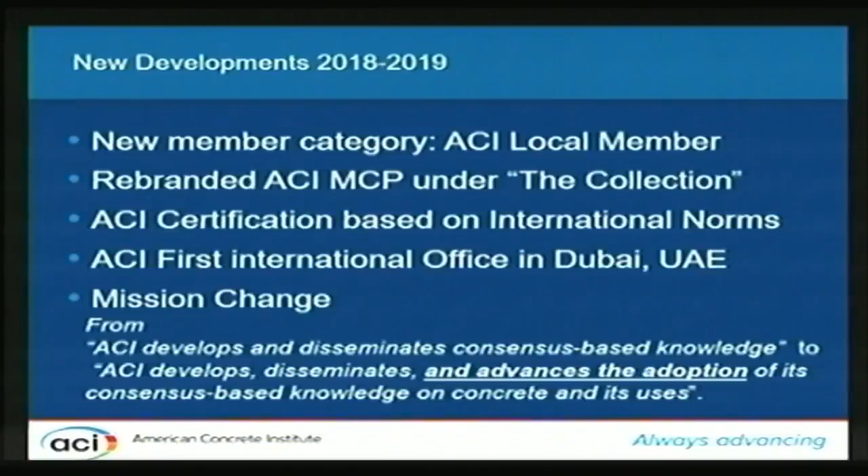And we thought that maybe ACI is very good at doing the library job. We build documents. We can make the best library in the world. But how are we sure that people are using this library? That this knowledge is actually transferred to practice, that this knowledge is actually being used the way it should be, because it is state of the art and really coming from experienced people who spend a lot of time in research and technical and practical experience, and bring this to ACI to develop the code, which is a consensus code.

So if you're in a room, everybody should agree on any statement, on every word. And if you ever went to an ACI committee, you would understand that this is not an easy process. So ACI changed the mission from developing and disseminating consensus-based knowledge to actually developing, disseminating, and advancing the adoption of consensus-based knowledge it's developing. And this is a major thing. So ACI is now having the responsibility to go and make sure that this document or this information is used the right way.

So just to summarize about ACI, I have a small video that tells you how you can be involved in ACI and why you should be part of ACI.

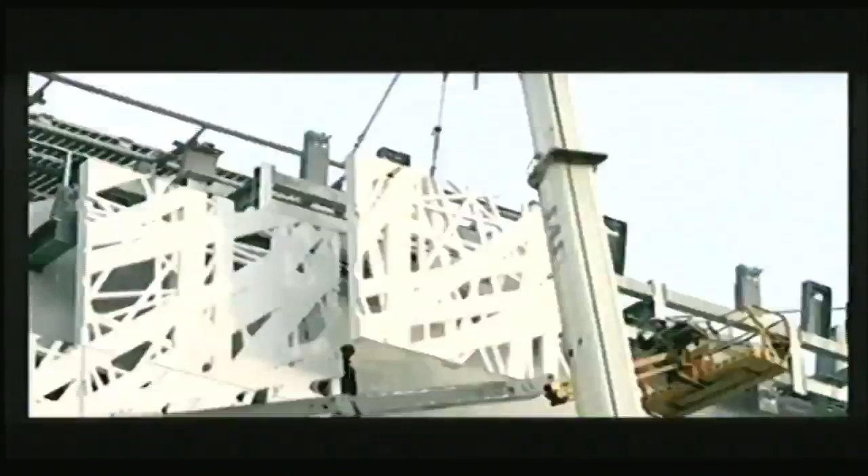Not everyone in our industry is a member of ACI. Just the ones who are pushing the concrete community further, adapting to new technology, investing in their careers, and dedicated to improving their design, materials, and construction. Those who are pursuing an education and teaching the next generation. Those who want to not only find more work, but do it better. Those who want to be part of a worldwide community of professionals, educators, and students in more than 100 countries.

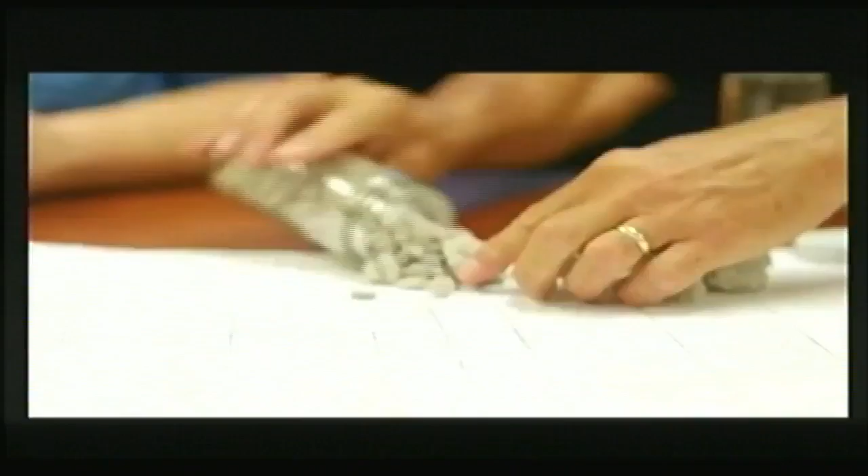Those who want to meet the experts and become the experts. Those who want to stay on top of the latest techniques and create new ones. Those who believe you can never learn enough. Who make sure things are done right the first time. Those who want to be the one others go to for answers on the job site. And those who want to create amazing things. You don't have to be an ACI member to work in the concrete industry, but if you want to exceed expectations in it, there's no better place to be. Whether you're a student just starting out or have years under your belt, ACI membership ensures that no matter what changes the world brings, you will be prepared to thrive, and your life's work will last for generations. Join us today at concrete.org.

So now you know where to go to get your ACI membership. Just go to the ACI India chapter and you can get your ACI international membership there.

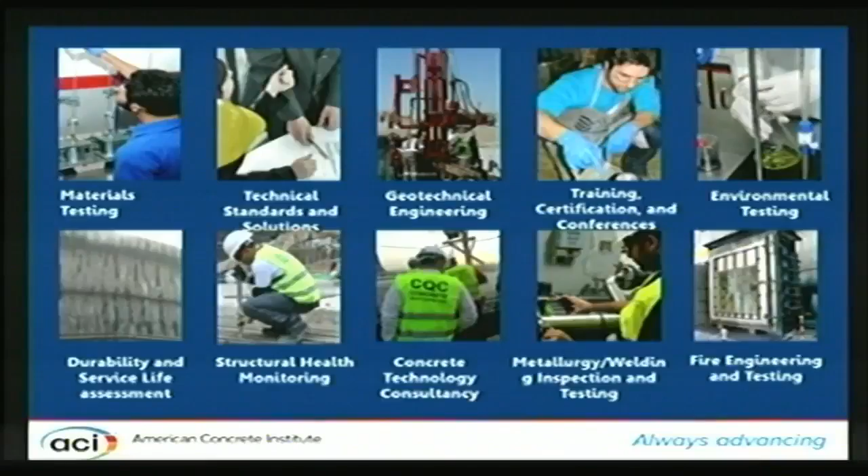And we're involved in some of the world's largest projects, because these projects happen in the Middle East. You all know about Dubai's Burj Khalifa, which is 800 meters. There's another one in Jeddah, which is 1,000 meters. I'll be talking about that. One of the biggest airports is being built in Jeddah. The biggest metro is in Riyadh. There are 7 stadiums that we're involved in in Qatar. So even in Lebanon, which is a very tiny country, we're starting to talk about 200-meter buildings, 70 MPa concrete, 500,000 cubic meters of concrete in a waterfront city.

So from Lebanon to Doha to Saudi Arabia to Kuwait, we have the International Airport of Kuwait, which is a very sophisticated design by Foster that really challenges any concrete expert. And all what you think about concrete, all what you've heard about in the last 2 days, is already in this project. So you have to actually experiment what we've been talking about.

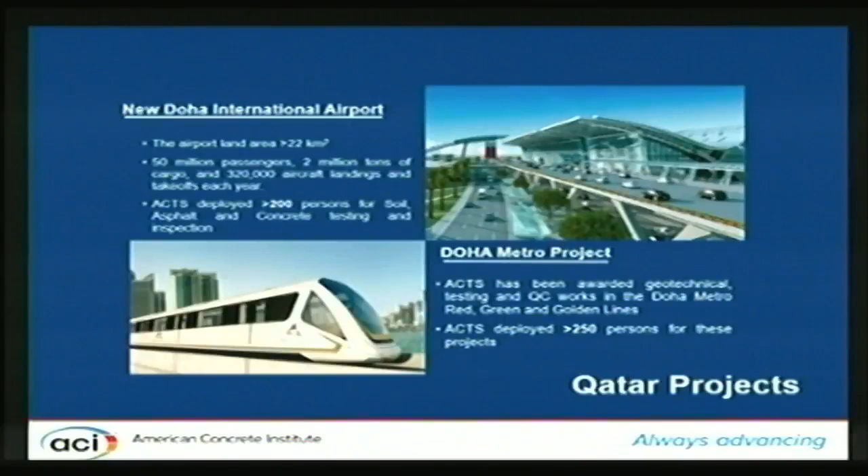And the new Doha Airport, the Doha Metro project, as I said, we have the stadiums currently under construction, 7 stadiums. We are involved in 7 out of 8 stadiums there. The Riyadh Metro project is still under construction. It's a huge project, around $30 billion with 6 lines. We're involved in 2 lines in a full-scale engagement, and in the other lines in different services.

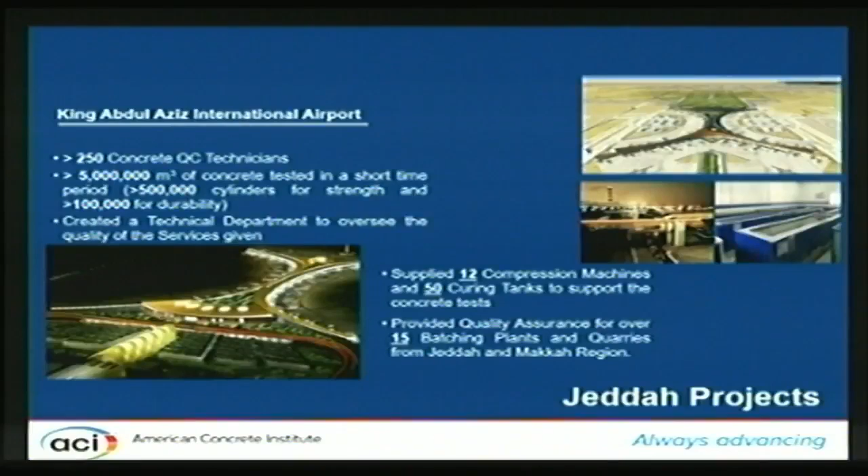The one I want to talk about is the one that really opened our eyes. This started in 2011, I think, into large-scale projects. It's the King Abdulaziz International Airport in Jeddah, where we really learned what scale means. I'll talk about it in a second. So in Jeddah there's also the Kingdom Tower project, I'll be talking about it in detail, and the Haramain high-speed rail, which is connecting different cities and also the new airport. But let me talk about the airport itself.

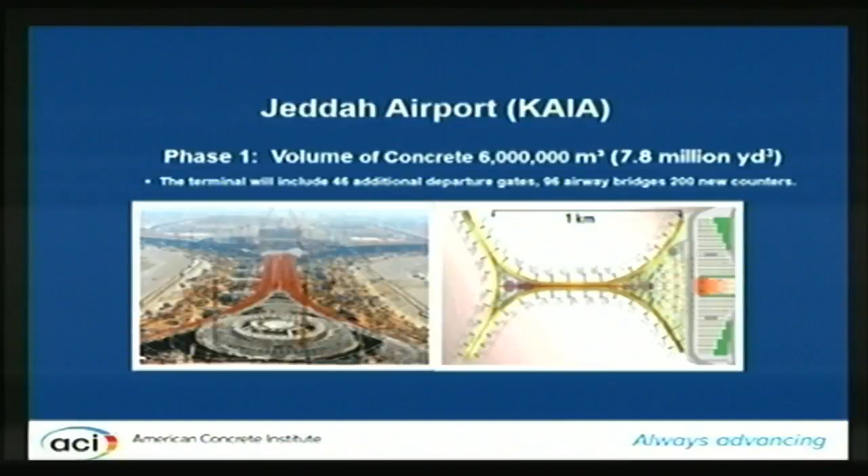So the total volume for this project is 6 million cubic meters. Initially it was designed to be finished in 4 years. We're in the 6th year now, and I think we need another year to complete. This is phase 1, for 30 million passengers, and there is another phase 2 that hasn't started yet. It involves a multi-story car park, railway stations, automatic people mover, and a road network around it, around 20 kilometers with an expressway, and of course the aprons, taxiways, and tunnels.

In the construction stages, we started with piling and footing works, raft foundations with mass concrete. The volumes even for piles were around 500,000 cubic meters. Raft foundations had 1.2 million cubic meters. Self-compacting concrete around 60,000 cubic meters for the arches. Roads and bridges around 1 million cubic meters.

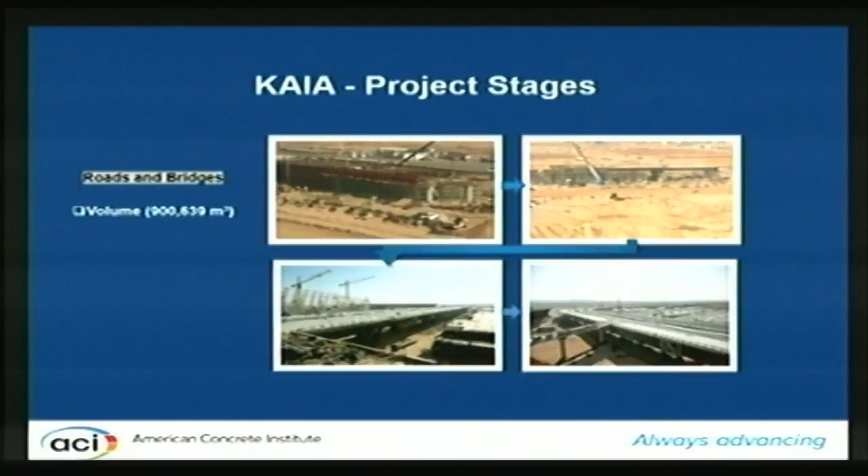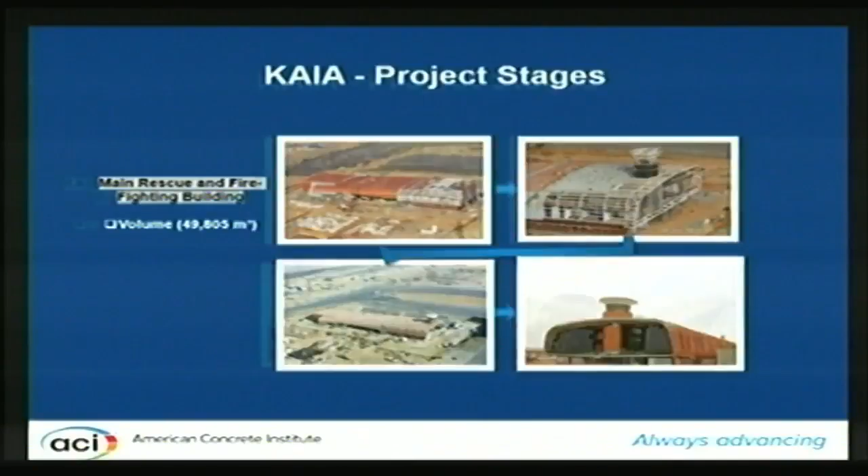And they started, and we're completing them as we speak. Passenger terminal building, 1.5 million cubic meters. Air traffic control tower, small one, but very, very difficult in terms of concrete strength and fairface and all what's needed. The firefighting building and rescue center, around 50,000 cubic meters, and the high-speed railway is another 500,000 cubic meters. There's also the automatic people mover, APM, which is 220,000 cubic meters.

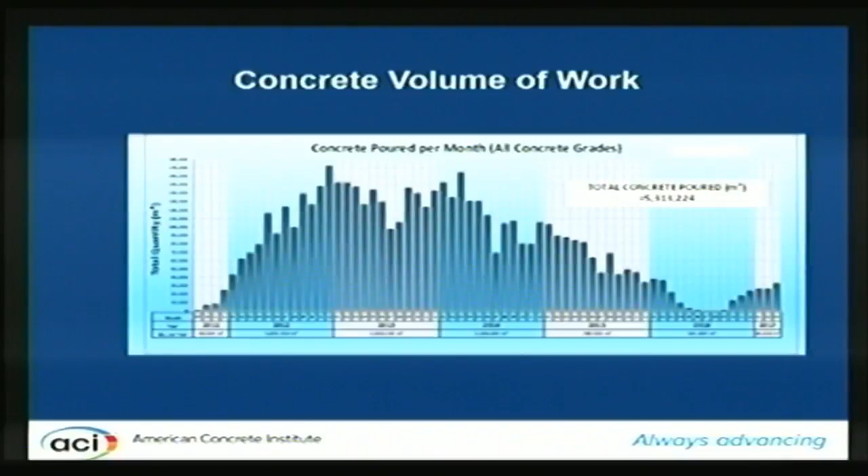Each one has a different requirement in terms of inspection, concrete grade, testing, early age, long-term strength, and long-term durability. The taxiways and aprons also have different requirements. So just to give you an idea of scale, this is 5.3 million cubic meters when I did this presentation, and we reach around 200,000 cubic meters per month, which is quite an intensive scale given the specifications and what's required in terms of testing.

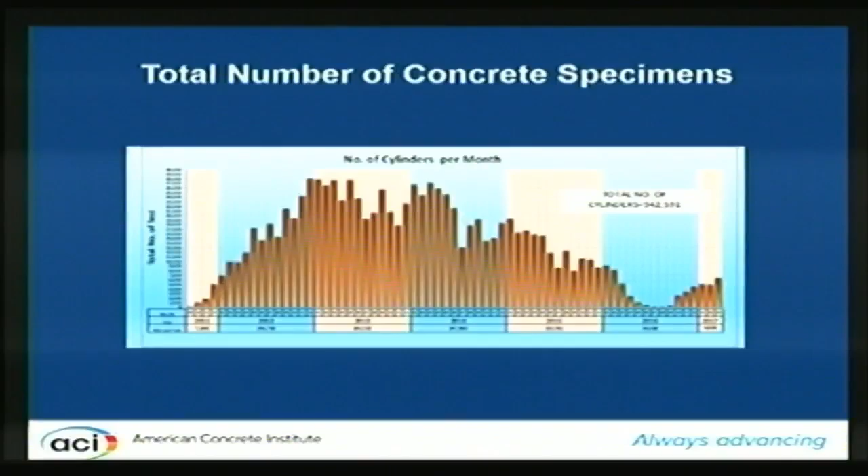And we had 35 mix designs to do there, and it's not just 2 per month at all batching plants. Again, this is the total tests on aggregates, around 200,000 plus tests. The concrete specimens, we reached 1,500 cylinders per day, some taken for compressive strength, some for durability. The chloride permeability, the absorption, all these tests were done also in parallel. So the scale is really staggering.

And when you have something like this, you cannot manage it the way we used to a few years back with papers. You need systems, management systems that take care of that. Otherwise, it's impossible, it's just not possible. It's not a luxury to have a system, it's a need and a requirement.

And once you start implementing the system, you see that you have a better way to manage the project, not just to give the information quickly and have rapid access to it, but in the input you can start having statistical analysis, understand trends in the concrete development program, understand the mix design fluctuations, and how it's coming from the batching plant or from the actual site. So all this information can only be done when you have proper systems implemented.

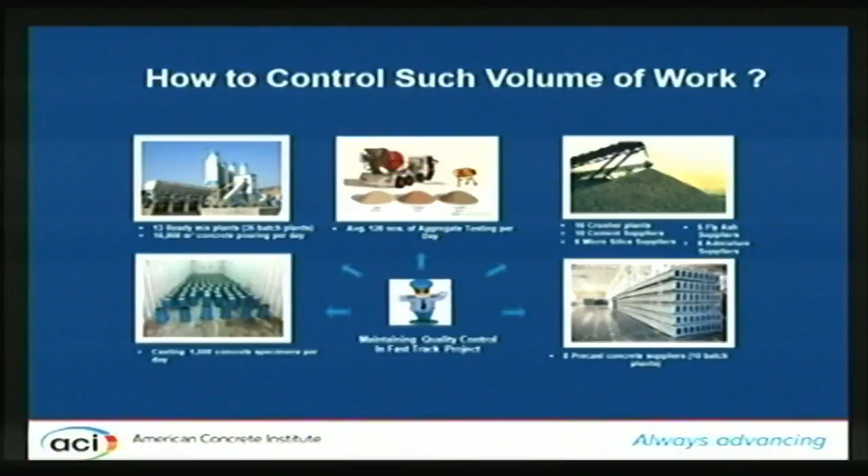So let me focus on the 1 kilometer Kingdom Tower in Jeddah. The project is aiming to become the tallest building in the world, 1,004 meters, around 176 meters higher than Burj Khalifa. The design was made by Chicago-based Adrian Smith and Gordon Gill, and Thornton Tomasetti for the structural engineering, who also did the structural engineering design for the Burj Khalifa project.

Initially what you do when you have a project like this, you grout the ground. You just inject grout to make sure you fill all the cavities even before you start the piling, and you really reinforce your ground before you do anything. Then you had 270 piles between 1.5 to 1.8 meters in diameter, with length varying between 45 and 105 meters. So the biggest piling machine was used on this project to handle this kind of pile size.

Then it was followed by raft foundation, 5 meter thickness. Yesterday we heard about mass concrete - this is typical mass concrete. Remember, Jeddah in summer is at least 45 degrees in the shade and 100% relative humidity, and this is what we had to deal with. The raft foundation happened in August, so that's another challenge we had to work with.

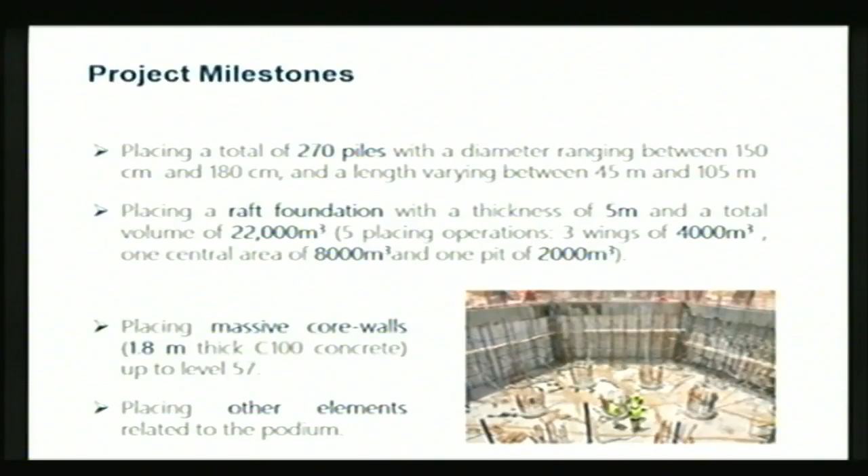Even the core walls were 1.8 meters thick. You think that mass concrete is mostly raft foundations - it is actually, in this case, it was even the core wall of the building. And even other elements in the podium and other columns were challenging.

So we are now at level 64. The project has its own issues because of some internal issues in Saudi, but the ultimate goal is to reach 266 floors, so 202 remaining floors.

As I said, Jeddah is not tolerant weather - it is hot, humid. Even in the winter, we get sandstorms or rain, which is very aggressive for half an hour and just spoils everything around it. So this type of weather brings all the challenges that you would think of.

You have to design and place high-strength concrete and high-performance concrete and mass elements, the raft, the thick core walls. You have to make sure that your finishing is adequate and curing is adequate for the flat work placing operations, and you have to always ensure there is continuous protection of concrete.

Add to this issue the wind. The structural design of this project is based on wind. Not only is wind a critical factor in the structural design, but it's also a critical factor in the construction, because you have to deal with wind when you're building the core wall and slabs at the 60, 70, and 80 floor levels. So you have to have wind breaks, make sure everything is protected, and your own laborers and workers are protected.

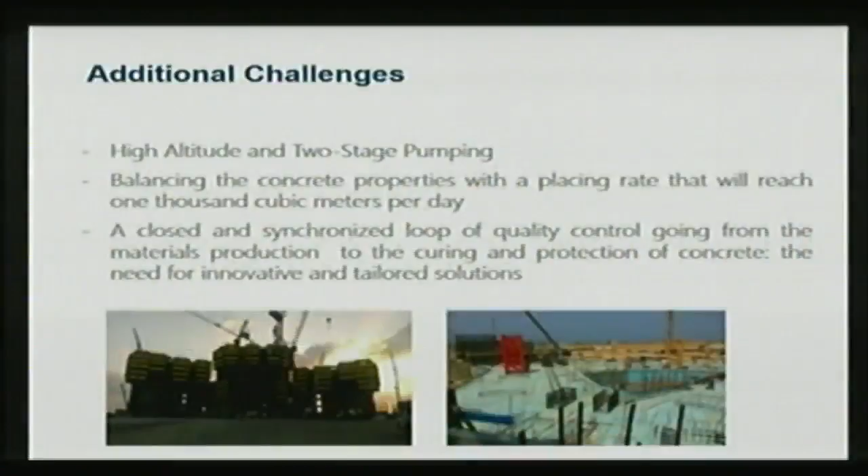We reached, for example, the conclusion that the best solution was to have a 7 centimeter insulation foam on the raft foundation, to make sure that the concrete mass is at a minimum differential temperature, reducing thermal stresses. So let me give you some of the QC highlights.

As I said, you integrate testing, quality control, inspection, and mix design development. These become integrated functions, not separate functions, for projects of that nature. You start from assessment of materials, the aggregates, sand, and cement, then move to mix design development, then back to quality control inspection, making sure the batching plant can deliver what you actually designed. You even check the formwork, because of hydrostatic pressure from the fluidity of the concrete. Then you do field testing, monitor the site pre- and post-placement, do the inspection, and evaluate the hardened concrete testing.

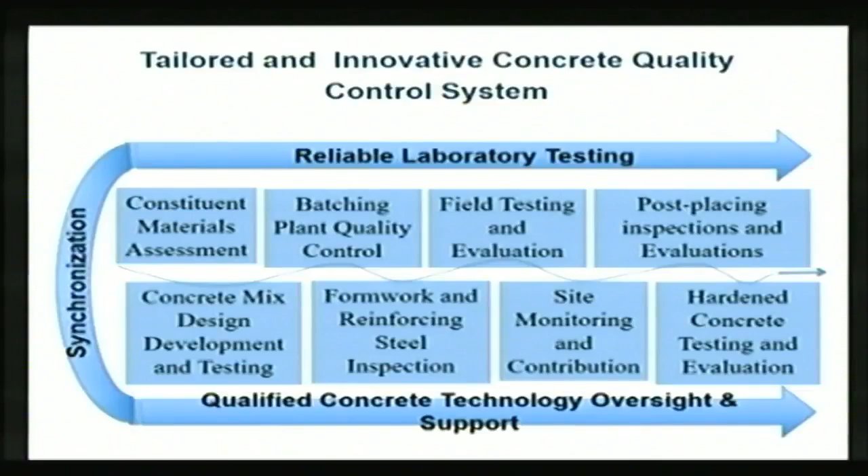The first thing we did was establish a site laboratory. This is something we couldn't manage otherwise, even though our lab was less than 50 kilometers from the project. We had to establish a site lab with a dedicated team. We built 5,000 kilonewton machines, since we were testing concrete of 100 MPa plus. We wanted to make sure the machines could handle that over time, the same for modulus of elasticity testing.

We developed a very tight QC program, and the challenge we took was to minimize repair. So we told the contractor our promise is to make repair costs related to concrete placing and construction zero during construction.

We also established an online system to manage all this information. The challenge was the project manager was in London and wanted real-time access to all information. We had designers in Chicago, people in Saudi Arabia, the client's main office in Riyadh, and the project in Jeddah. So we had multi-stakeholder locations that all needed access to the information. This is an uncharted project, so people are interested to understand what's going on step by step. This is more than a $1.5 billion project.

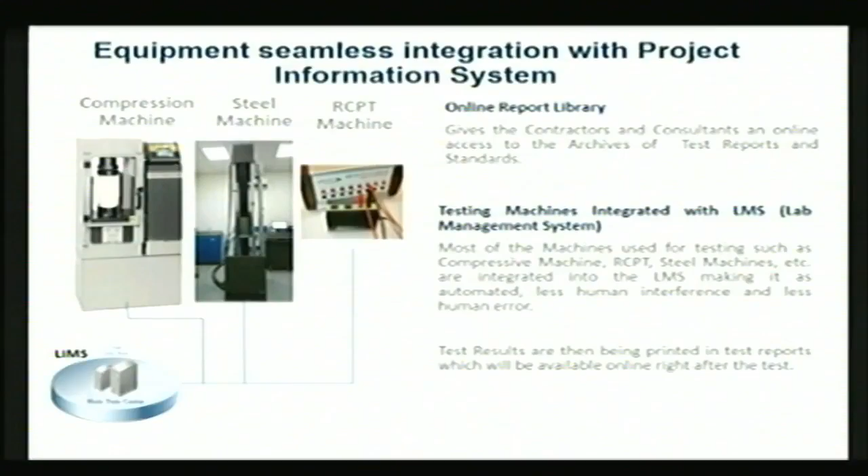This meant minimum worker involvement in writing results—the result comes from the crushing directly to the database, and the database issues the report as soon as it receives the result. Not only that, all this information is stored in the cloud and accessed by the different stakeholders. We had our LIMS installed on the project, ensuring archive access and real-time access to testing information and trends.

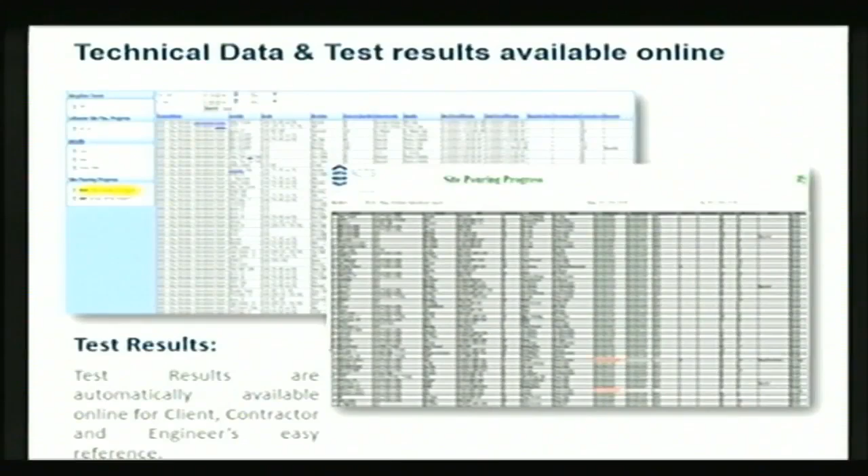So people could access test results online, not just hardened concrete testing but also fresh concrete testing. All our technicians and engineers had iPads and tablets to log information as soon as it came in, so people could have access to it—slump flow, V-funnel, all logged real time through tabs and sent to our LIMS automatically.

We also have online applications developed specially to manage this project's pouring system, so we understand how much concrete is being poured, how much is on each pump, how much is at the batching plant, how many trucks are at the batching plant, how many are on the way, where they go when they arrive, which pump they should go to first, and whether to keep a pump or take it out. All this was managed pre-construction, and we developed a system that ran perfectly for the contractor, especially in August when ambient temperature is above 45, so tolerance for delays is practically zero.

And all the thermocouples, which you heard about yesterday in the presentation, were also linked with our LIMS and information system, so everybody could see the concrete temperature—the fresh concrete temperature—through the tabs, through direct logging of information, and also the thermocouple data backed up to the system.

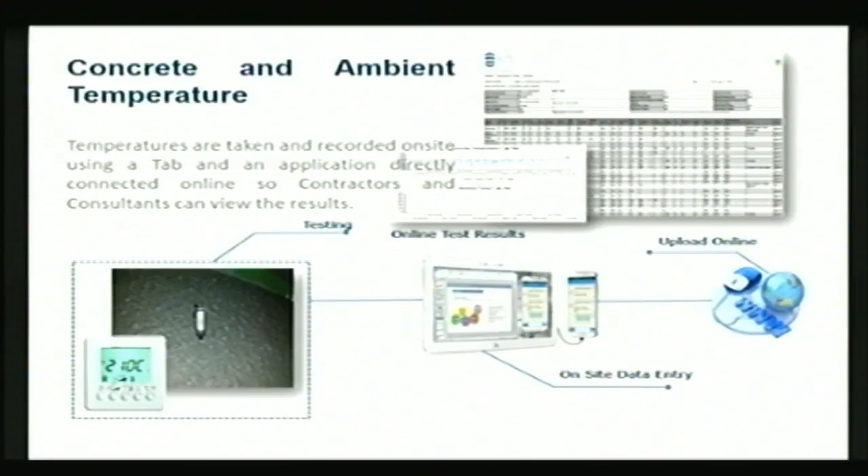So we took slump flow, T50, J-ring, all these SCC tests that you normally do for the self-compacting, self-consolidating concrete. We took these tests and we also logged them live. And visual stability index, all this information was uploaded online as we did the test.

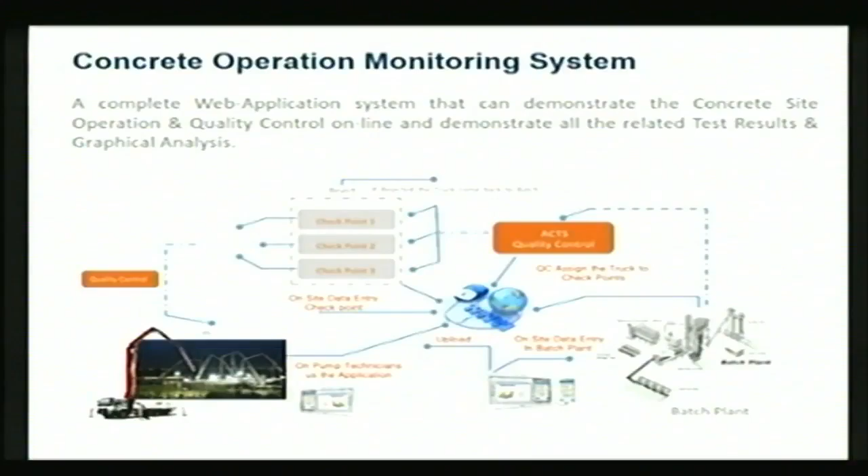And again, the monitoring system was important to check the trucks and the flow of the concrete on the pump to make sure that we maintain a proper flow to avoid cold joints in the raft foundation and even in the core walls. And the truck monitoring system with GPS on the trucks, and also giving the GPS information to the truck monitoring system so we understand which truck is going to come, and if there is a delay, what's the reason of the delay so the driver cannot stop on the way or something. Everything was managed to make sure that the concrete flow is consistently regular.

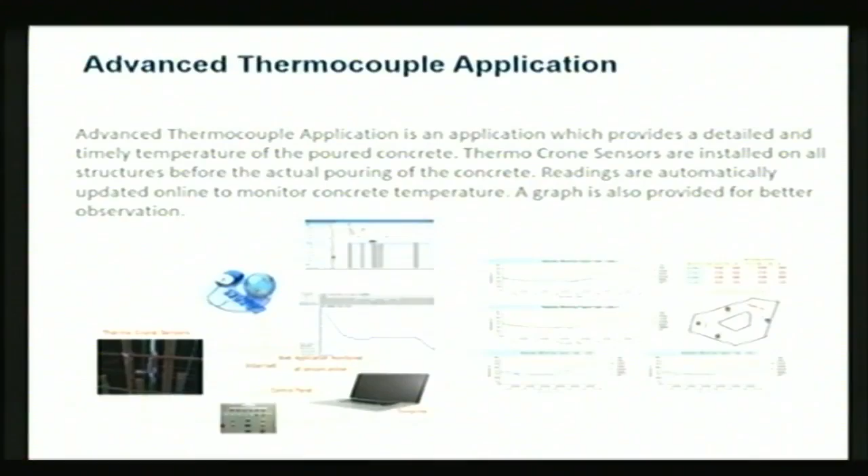So in a project like this, as I said, you have the hardened concrete properties that you know how to deal with. You do the mix design for strength, for slump flow possibly. And you have different grades. We have 30, 40, 50, 60, 65, 75, and 100 MPa grades. It's much better than the airport project where we had more than 30. But even for the blinding, they used 30 MPa concrete. So there was an obsession of making sure everything is safe, everything is structurally right.

But at the same time, it was our responsibility to make it economical for the contractor, because you can throw anything you want on the mix design, but if the contractor doesn't approve the cost, nothing will happen. So we had to really use optimization techniques to get the mix to be economically feasible. The C40 and 50 were used for the slabs and the podium elements. And again, there you had normal concrete, 40, 50 MPa.

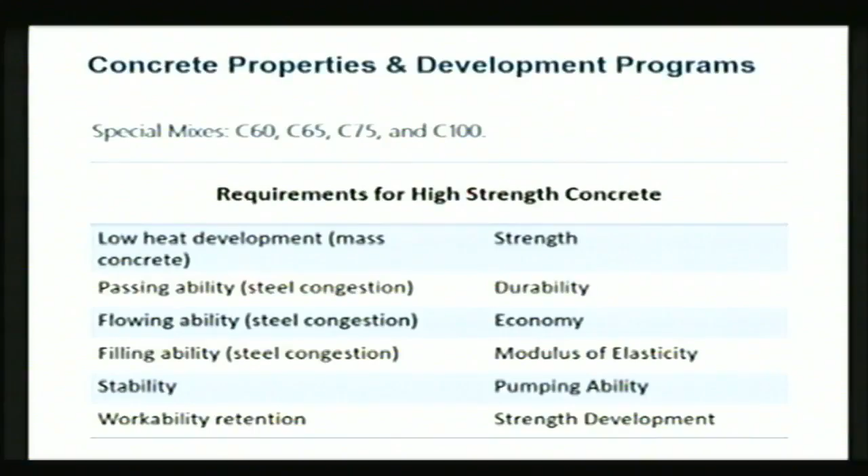Now, all these were not actually specified. So no one told us how do you want the concrete to pass the congested steel, or informed us about what type of flowing ability, the filling ability, the stability of the mix, and what is the pumpability requirements. How do you translate pumpability requirement into numbers, into fresh concrete properties? There is no book that tells that. Even at ACI, you don't find this, because there is no project of 1,000 meter or 800 meter concrete pumping. So we had really to go into a big development program.

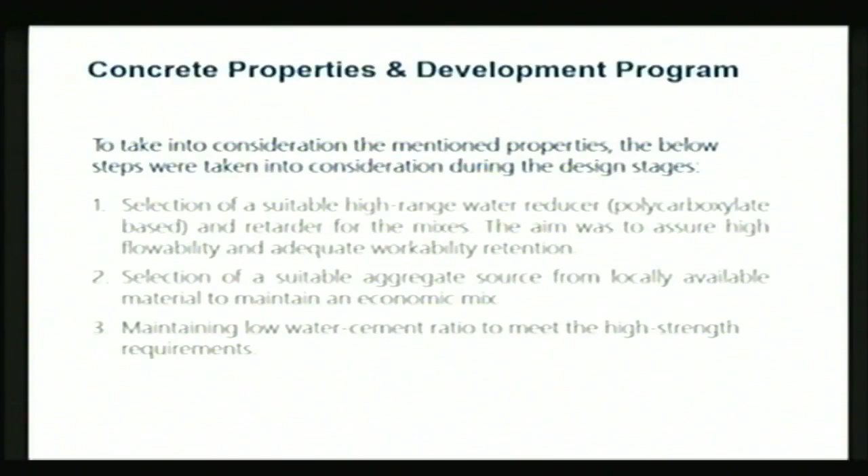First, we had to use the right admixture. So it's a polycarboxylate-based admixture, of course, but we had to add a retarder to make sure we had the retention. This is hot weather concrete, and it's not something you would just play with, especially when you have the core walls, and sometimes they take time. The aggregate was the key for the modulus of elasticity, and I'll talk about it in a while. You want to make sure that you had the water cement ratio low, so to achieve the high strength requirement, but if it was too low, you'd have other problems with the pumpability. So that was another balancing act required.

And the optimization process, as I said, the contractor was looking for cost, and wanted to make sure that we have all the ranges of water cement ratios required to make sure that we address this project properly. We use fly ash as a partial replacement to reduce the heat development, and we use silica fume. We optimized it at 7% to make sure that we get the water cement ratio low enough and we get the durability and the permeability requirement. And we had to really play with the fines and the coarse content and the viscosity modifying agent to maintain the mixture stability.

So what we did, we actually put some limits on ourselves. We said, all right, this is 100 MPa concrete. This is the one that's going into the core walls. And the 100 MPa concrete should have a slump flow of 700 millimeter, which is quite high. J-ring less than 25 millimeter. J-ring is the difference between the slump flows, one which is without the actual cage, and one after the cage, and the difference should be less than 25 millimeter.

The V funnel, less than 13 seconds, 0% column segregation test, strength 100 MPa at 90 days. We agreed with the engineer to be 90 days for the strength. Modulus of elasticity required was 43 gigapascal, and the permeability required on the 1202 was 1,000 coulombs, 20 millimeter penetration on the DIN 1048, and the water absorption, the European test, 2% maximum, and the maximum temperature of concrete was 75 degrees. So these were the actual requirements, and the actual came all right, except for the modulus of elasticity. It was impossible for us to achieve 43 gigapascal.

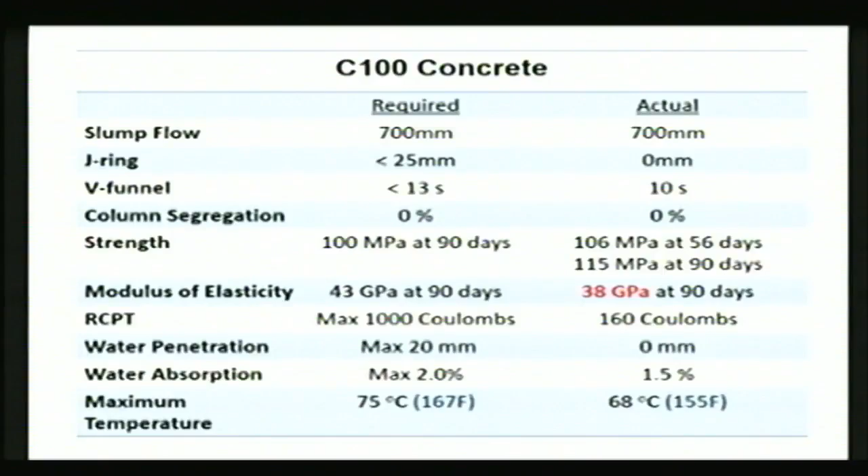And you know, when you have a tall structure, the reason why you specify a modulus of elasticity is because you don't want the people on the top floors to sway with the building. So you want to minimize the sway of the building. You want to keep some sway, but not something that makes it uncomfortable for the people living there. And especially since the owner of the building will actually live in the penthouse on the top floor, you want to minimize the sway. So MOE was a very critical requirement.

So we also had to do high altitude pumping trials. We cannot tell the contractor we'll pump it up 500 meters and then another 400 or 380 without showing him that we can do it. And how can you show it? I mean, you don't have any place where you can prove that this is doable. So we had actually to simulate the vertical height with horizontal length. So we did a 1 kilometer horizontal pumping line, and we had elbows and flanges to increase the pressure. So we simulate the vertical height with the actual pressure on a horizontal level. So each elbow was 1 bar, each flange was half a bar, and we added that. So we designed that system to simulate even more than 500.

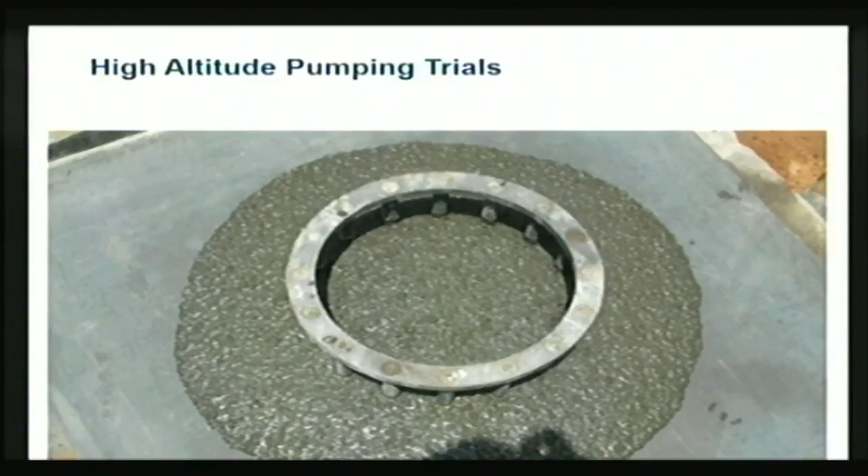We even had to look at the pump pressure. We found out that anything above 200 bar on the pump will not take the concrete up there. So we had to actually reduce the pump pressure below 200 bar, and we had to work that out by first taking the pump away from the first elbow. So you had a horizontal distance, which is 25% of the vertical distance, that you should maintain. And then we also had some slope for the initial horizontal outlet of the pump to make sure the back pressure on the pump is not very high. So when you pump the concrete and the concrete is going back, it doesn't really add to the pump pressure.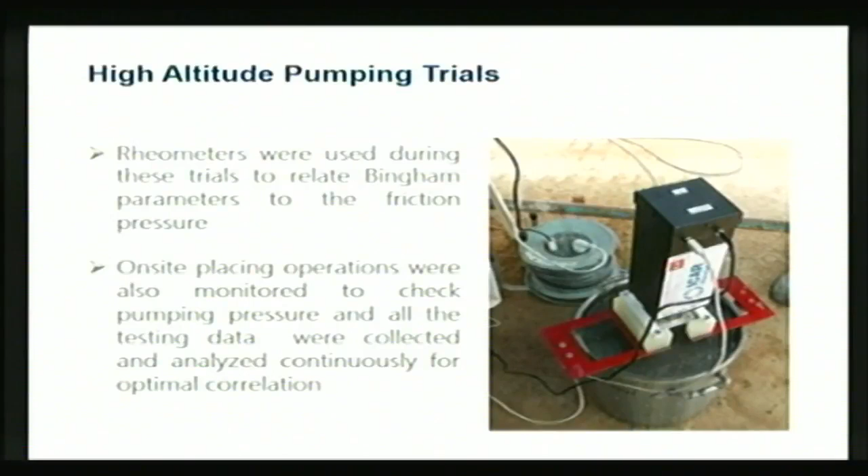So we even used the Bingham model. We actually had to test the yield stress and the shear, as you saw yesterday in one of the presentations. When do you use this? You use it when you want to make sure that with all this pressure, this concrete will not lose its stability. It will not shear up, and it can resist a certain stress. So this is a very necessary testing property that you need to have when you are on site with projects like this.

So we tried to get the flow above 600 all the time, and made the pumpability limit below 200 bars. And as I said, 13 seconds was the limit, but we found out that we actually needed much lower than 10. I mean, we could still pump below the 13-second V funnel. But to really have a proper flow that keeps the concrete going, you needed 8 to 10 seconds. And the viscosity... You have 2 minutes.

Yes, we're finishing. 80 Pascal second, we want to maintain that. So that's why we said we don't need self-compacting concrete, for many reasons. One, it's very difficult to control at the batching plant. Second, we don't want to have a high viscosity. It will be very difficult to pump this concrete.

It will be very difficult to manage it. And the QC measures at the batching plant were already very difficult. So with SCC, it would complicate our task even further. And the main problem was to find the MOE, the 43 GPa, and we couldn't.

And we told the engineer, we changed the aggregates, and we found out that the aggregate shape, the quality of the aggregate, the nature of the aggregate, the geology of the aggregate was so important to get the MOE. And we convinced the engineer that we're not able; the strength kept increasing, the MOE was not increasing. So this relationship between MOE and strength, which was proportional, did not work. So when we changed the aggregate, things became better.

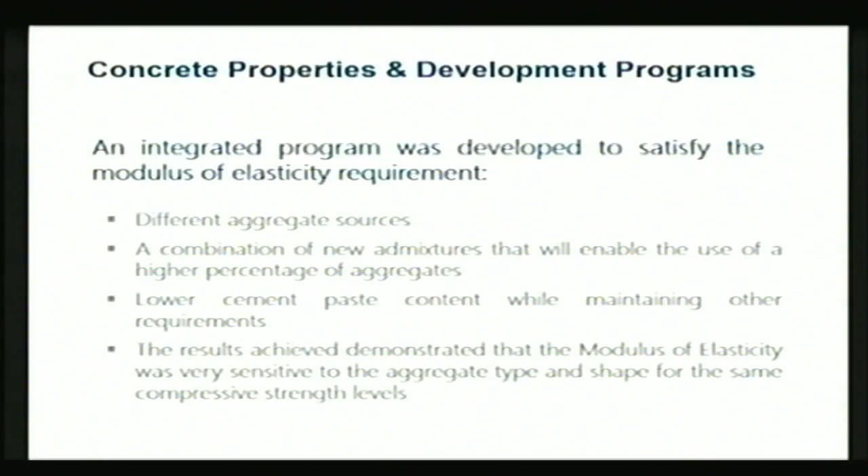So we agreed, because the engineer had a very high stringent requirement of 43. He accepted 38 because this is what we could actually achieve. What I'm trying to say here is that in conventional concrete construction, you normally have pumpability or placing, workability, strength, and durability. But when you come to super tall structures, you have so many other things that you have to balance. And when you balance that, you have to engage the designer with you because they don't know about the fresh concrete properties. How do you achieve this pumpability requirement or the rheology that was demanded? And that's why you need a balanced approach.

And this balanced approach is something that was not codified, so we don't know about it. So I think one of the conclusions is once we have this information out of the Kingdom Tower, we'll be able to codify some of the fresh properties, requirements, and the balancing approach into codes and guides. And I think the other conclusion is that when you have a super tall structure, don't run into the hardened properties before you do the balancing approach properly between durability, pumpability, and MOE.

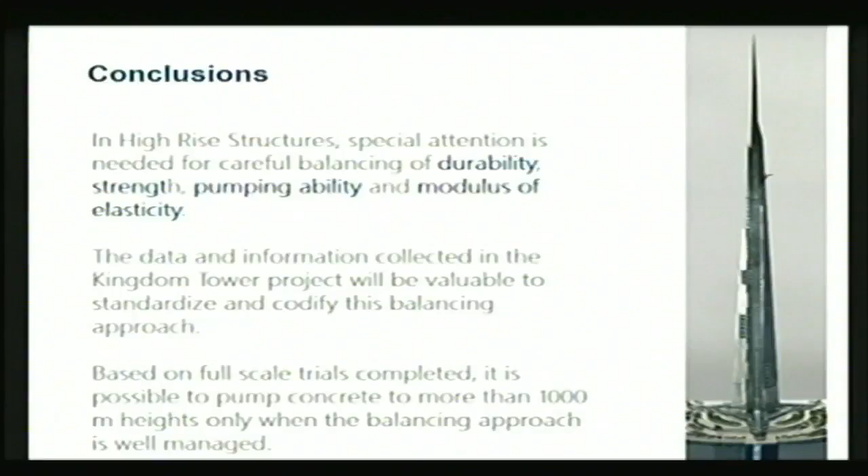And one final conclusion is that based on the information that we have today, we can easily pump concrete above 1,000 meters. The technology is there, admixture technology is there, mix design knowledge is there, and what we have seen is that with the pumps out there, you can actually pump concrete above 1,000 meters.

Thank you very much. Thank you, Mr. Abbott. I think excellent presentation. Please give him a big hand. Thank you. Thank you. Yes, one question. Yes.

This particular concrete mix design, you are telling it's a flowable concrete. Yes. But you are telling it's more than 500 mm, that's all. What was the highest flow you got? Because viscosity is lower than SCC. Yes, that's what you mentioned. Absolutely. This is one question. Second question is modulus of elasticity doesn't match with the established relations. Yes. You told the reason is you wanted to limit the sway. Third question is, were creep tests conducted in this particular study?

Of course. We have a full structural health monitoring system. So there are sensors on every core wall and different sections of the building. I have a different presentation on structural health monitoring, what we're doing there. So we're monitoring there and we're checking the creep and the shrinkage, but we're testing the creep because what we found is that in the first 6 months, the creep is something that you have to test before you can start using the correlation in the formula.

Whatever you do, you have to use the testing results for creep in the first 6 months. After 6 months, you can start using the models that are out there for creep. But yes, we tested creep and shrinkage, and we check them every 30 days based on the structural health sensors that we had in the building. So that's the last question.

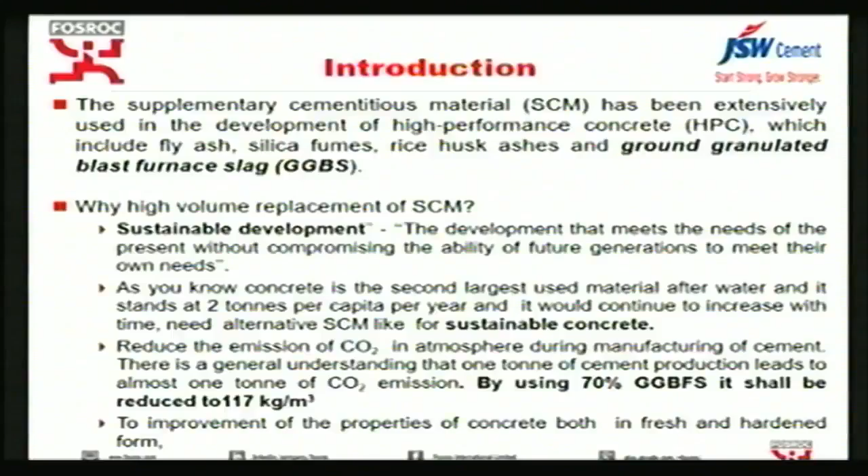Hello, Manjunath. Yes. What we will do is, because there is a mixing process involved, I will explain what this is. We will start loading the drum. You continue with the presentation. By the time you finish your presentation, the concrete will be ready, instead of stretching it long. Okay. Right.

Good morning, ladies and gentlemen. This is the second seminar on ground granulated blast furnace slag. Apart from that, we would like to emphasize the point that if there are some variations at site, with the same mix design and the same kind of chemicals, even with different aggregates the mix will still be the same. That's something we always have problems with at site. The fine aggregates get into the trouble of not getting things right.

Right now you can see here, this is the high volume of GGBS and very little amount of cement. So of the cementitious material, you are going to have only 30% pure cement and the balance is GGBS. And what we have here is typically the zone 2 sand and zone 1 sand. You can see that coarse materials are there.

Now we start loading the drum. We'll start mixing the concrete here, probably without the audio; in one corner of the screen you will be watching what is happening. What type of mixer? Because you are mixing too many powders here. We are using a pan mixer, sir. Okay, okay.

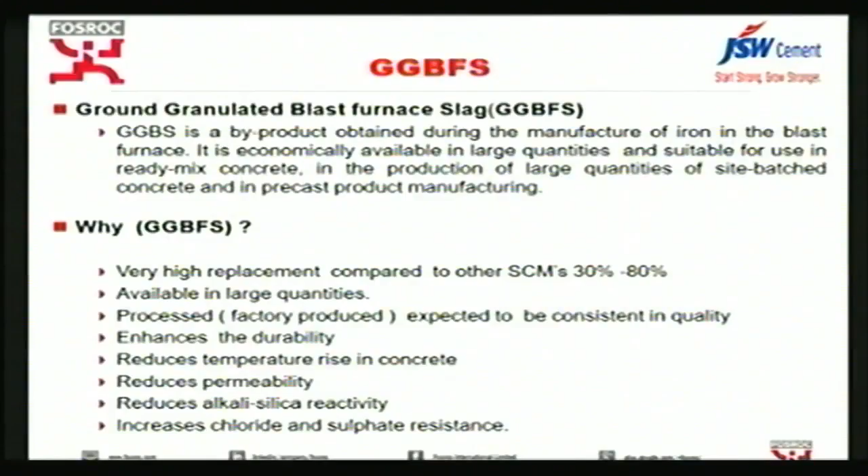So the advantage of using GGBS is not only that it brings down the cost of concrete making substantially, it gives other benefits like enhanced durability and reduced temperature in mass concrete applications. These are the advantages of using GGBS in high volume concrete. I request my partner Vamdev to take over.

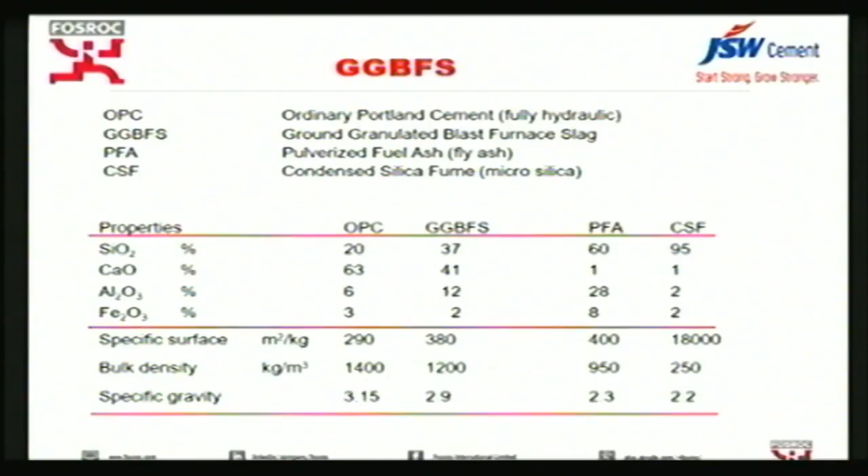See, we have many advantages with the GGBFS. Maybe the limitation, I can say, to overcome these limitations, these are some of the things where we can see how we can overcome this: probably increasing the surface area of the GGBFS so that the hydration reaction will be slightly faster.

What we understood from JSW is that earlier they used to have around 320 surface area. Now they are grinding it to 380 actually. That could be one of the reasons it can help in getting the early strength. The other one is by reducing the water cement ratio, and the point for young engineers who are present here.

See, we know the properties of the concrete: workability, strength and durability. These are the 3 properties. See, workability is the ease with which concrete can be produced, transported and placed at the place where it is required without any segregation. So to produce a good concrete, we require adequate workability.

So just assume that there are no chemical admixtures. How are we going to increase the workability? Either keep the cement constant and increase the water cement ratio, or alternatively, keep the water cement ratio constant and increase the cement content. In either way, if you increase the water content more, it is going to affect the durability and strength.

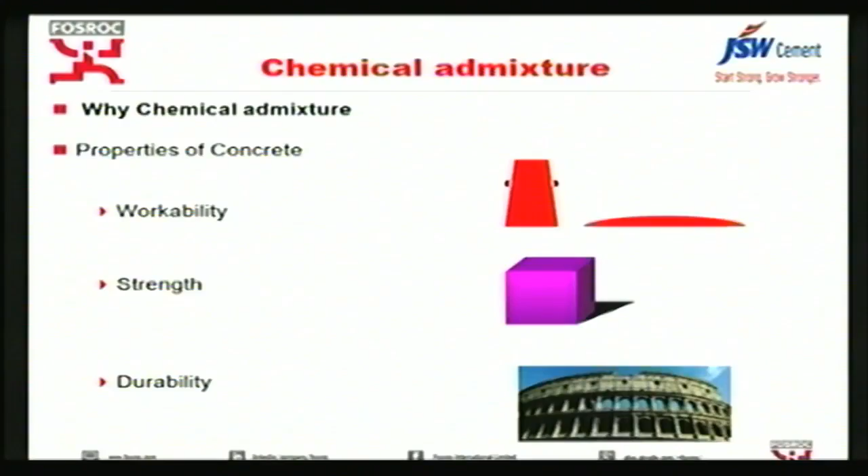And even if you increase the cement unnecessarily, it is also not good for the concrete and also from the point of economy. So this is where we are looking for a chemical admixture which can improve the workability without affecting these 2 properties. So what is this chemical admixture? This is an additive added to the concrete to improve or modify some of the properties of the concrete. As you already know, I will not take much time explaining all these things.

See, chemical admixtures like water reducing admixtures are used to increase the workability. Earlier we were talking about only the slump. Now people are looking for flow concrete of 600 and 700 flow. Chemical admixture is very much necessary. So most of the requirement now is the retention of slump, 3 hours and beyond. People are even talking about 4.

And to achieve the early strength, of late, a lot of precast constructions are coming out. People are looking at 8 hours 10 MPa, 8 hours 15 MPa, especially in the precast industry, to make the formwork turnaround. For early strength, earlier we used steam curing. With the invention of this PC-based admixture, without any steam curing, we are able to successfully achieve 10 to 12 MPa at 8 to 10 hours, so that it will be enough to handle the concrete. Secondly, the stickiness has to be reduced actually.

Nowadays the PC admixtures which are available will help in reducing the stickiness, and reduce the bleeding and the permeability. See, what exactly the market looks for, especially in this part of the world where slag is easily available: now they want to go slightly higher, probably 60 or 70%, from the point of durability and economy. And when they are using such high replacement, the strength development should be very similar to the current one, like 40 to 50% replacement.

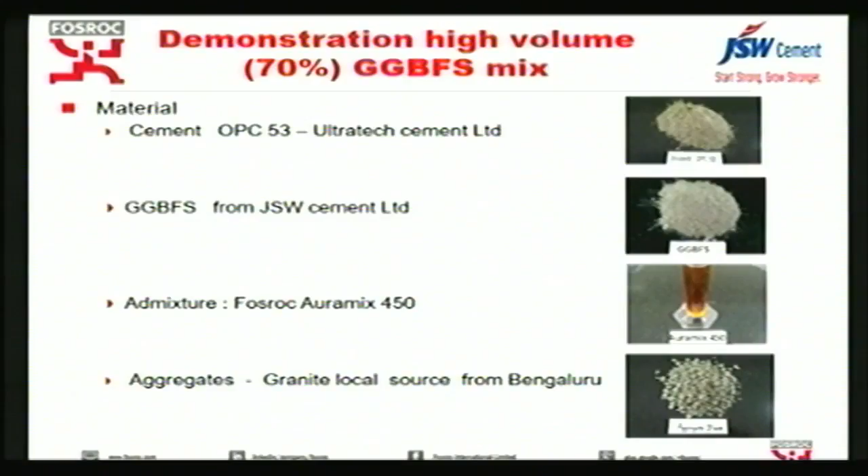So these are the materials we are currently using there. We are using cement, OPC, UltraTech cement, slag from JSW, and chemical admixture, that is a PC based admixture from Fosroc, brand name Auramix 450, and we are using local aggregates.

That is the advantage, so higher replacement can be done.

Just to brief about our admixture, what we are using - it is a PC based admixture, new generation admixture. It gives very low viscosity and very low stickiness. This kind of admixture is ideal for supplementary cementitious replacement like high volume slag, especially from the point of pumping, and very long workability. We can easily get beyond 4 hours workability retention without any slump loss.

To interrupt you, the first mix is ready and the second one is on. In order to release the drum and save on time, I'll be interrupting you.

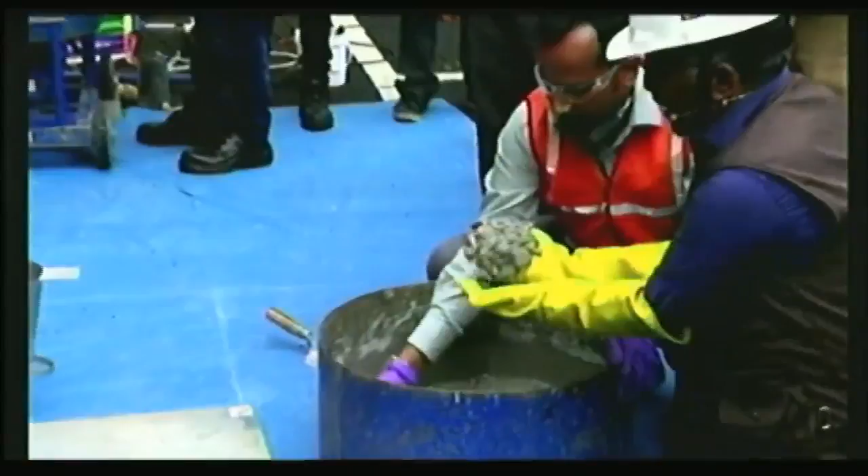The concrete mix with zone 2 sand is ready. You can see here - I'll take the flow and check the cohesion.

What you see on the rear side.

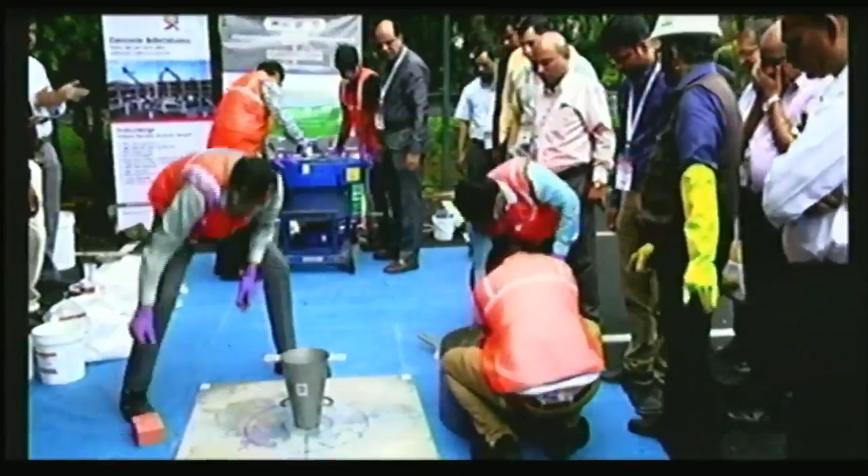The mix is going on with one sand. Quickly I will show you what is the flow. Okay, 1, 2, 3.

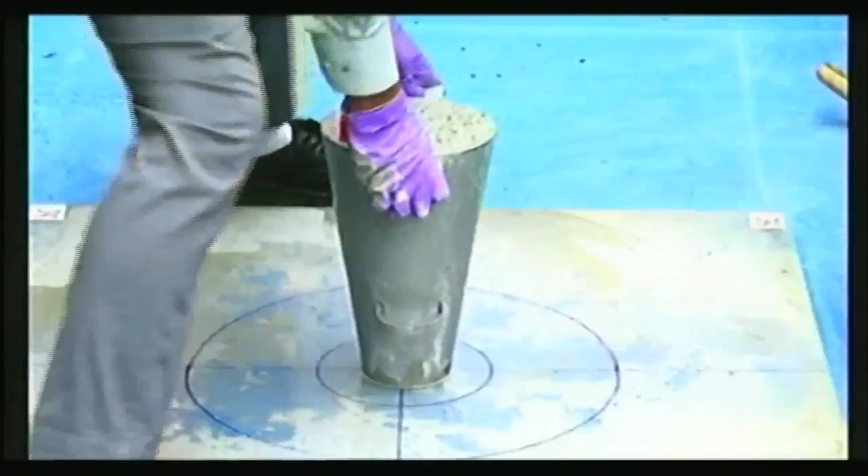Very good, very important thing to notice - the concrete is flowing, no bleed water observed.

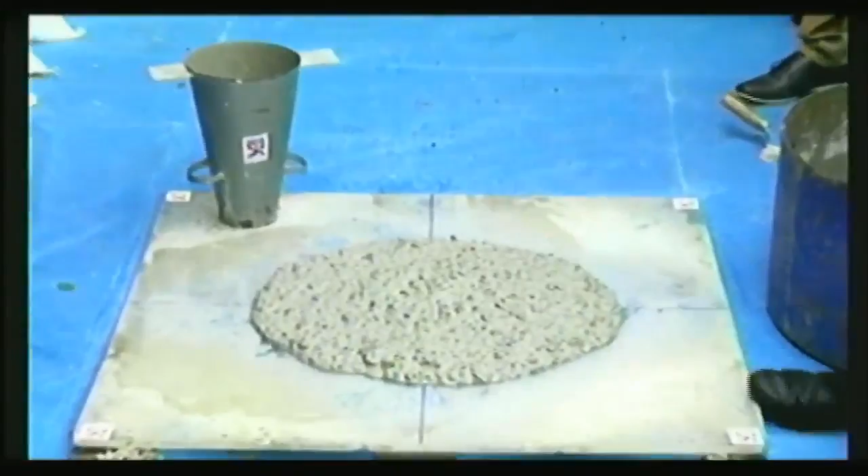This is zone 2, sir. We have Dr. Nagendra with us verifying which is the zone of the sand. Flow is 620 mm.

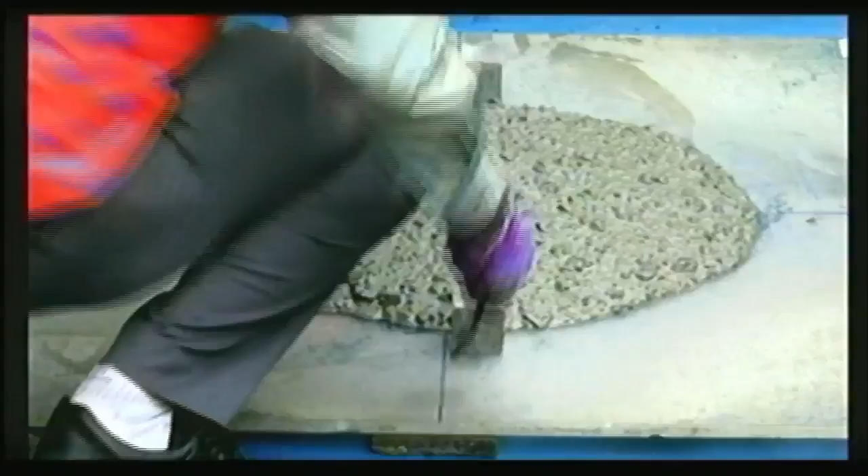Just to brief on this PC-based admixture, as I mentioned earlier, because of these functional blocks, now we can blend all the retarders and the VMA in a single admixture, and if anyone wants a separate retarder from the point of quality control, or a separate VMA, that is also available. But one point I stress here is, nowadays the PC-based admixtures available in the market have retarder and VMA built in. That was not the case earlier when PC admixture was first introduced into the market.

The cement content is 114 kg per meter cube, and GGBFS is 266, that is 70% GGBS and 30% OPC replacement. For 20mm aggregate, sand is around 53%, and water cement ratio is 0.4. Admixture dosage varies from 0.6 to 0.75. Anyway, we'll just confirm with Nagesh what dosage was added there.

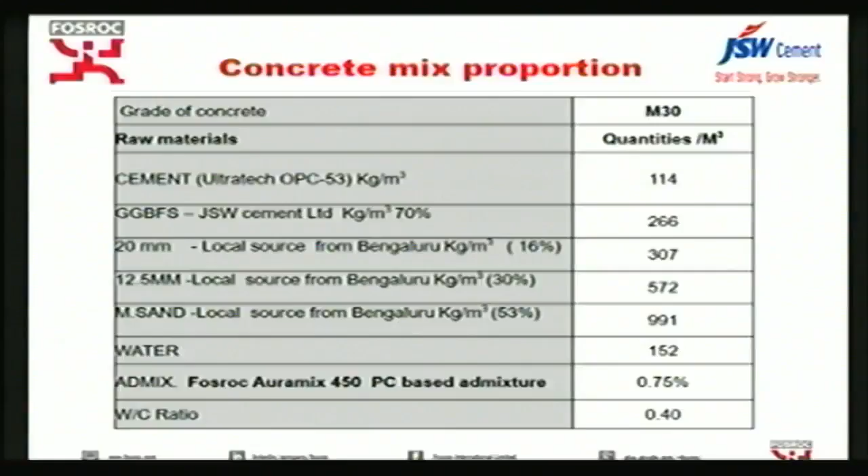Vamdev? Yeah, we are ready with this - this is zone 3 sand.

Hello, hello, check - am I audible there? Yeah, okay.

Nagesh, please confirm what dosage was used there. 0.8 dosage. Mr. Vamdev, I have a question - in both cases? 0.6 and 0.8, whereas all other ingredients are same. Vamdev and Vijay Saab, I'm getting a clarification here - for the 0.6 case, ingredients including water have been kept constant.

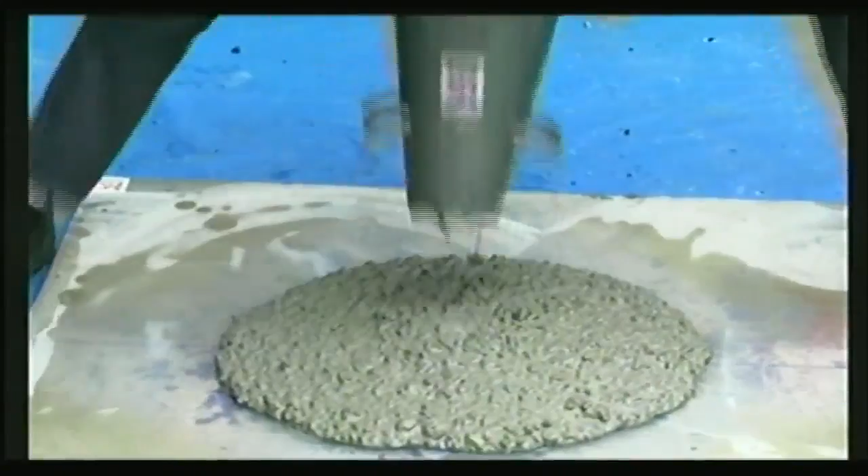They have tuned up the admixture dosage, and looking at it physically, it's still moving, but we have got the same flow as we got last time. I think the shape is a little different. Yeah, 640. Can you go on the other side also?

590 on the other direction.

Vijay Saab, okay, what we have to look at here is the smoothness that we are going to get. I'm just bringing things nearer to the camera. Yeah, it is visible. Probably when we are looking at what is called form finish concrete these days, these kinds of robustness in the mix would definitely help.

Okay, thank you. The third mix will be ready by the time Vamdev completes his presentation. Thank you, Nagesh. Meanwhile, one minute, Dr. Nagendra is here, he has a question for Vamdev. Okay, welcome, Mr. Vamdev, please, sir.

Irrespective of the zones, that is zone 2, zone 3, and zone 1, have you kept the fine aggregate or total aggregate proportion the same? I think they are the same.

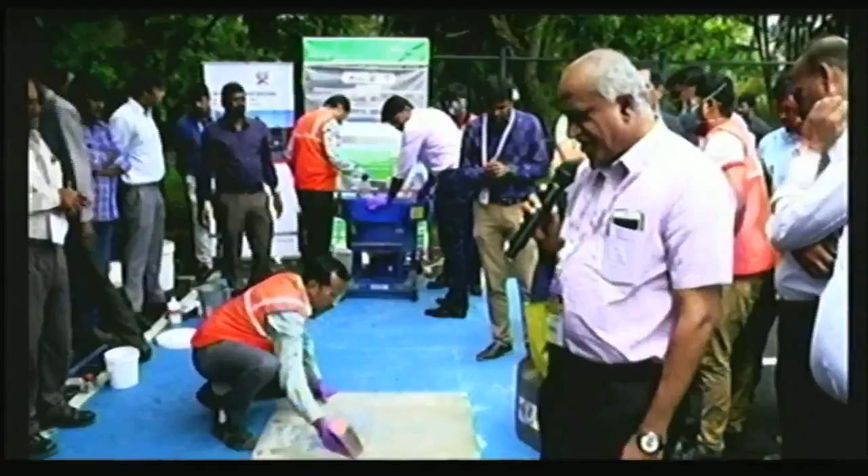Can you hear me? Yeah, I'm hearing you, just looking at the mix. See, what we did in the laboratory, 991 we used for zone 1, and 928 for this weight, same thing. So as the zone increased from 1 to 2 to 3, we reduce the sand content. Zone 3 we have reduced, we are at 879 against the 991.

I just want to make some correction. It's not the same mix, the mixes are different as per the zone. When the zone changes, definitely the mix has to change, so those corrections have been taken. Only the cement and GGBS contents are the same. Total water content has remained the same. So it is the fine powder GGBS and the admixture making the concrete flow.

Now my next question is, which one is most predominant here? Is it because of GGBS or because of the admixture that we are getting the flow? This question goes to both Manjunath and Vamdev.

Come back, come back, this is called trapping and falling into your own trap. So let me... yeah, these are, as I mentioned, some of the properties in these slides. Otherwise, I am through with the presentation. The live demo is going on.

Any questions, you can take them from Vamdev, because I need another 3 minutes to complete this job. Here the mixing is on, so by the time the drum is taken out, you can take questions. And the tricky question that Dr. Nagendra has pitched in, we have Shiv Prakash here who says he would chip in with the answer. Okay, go ahead, Shiv Prakash.

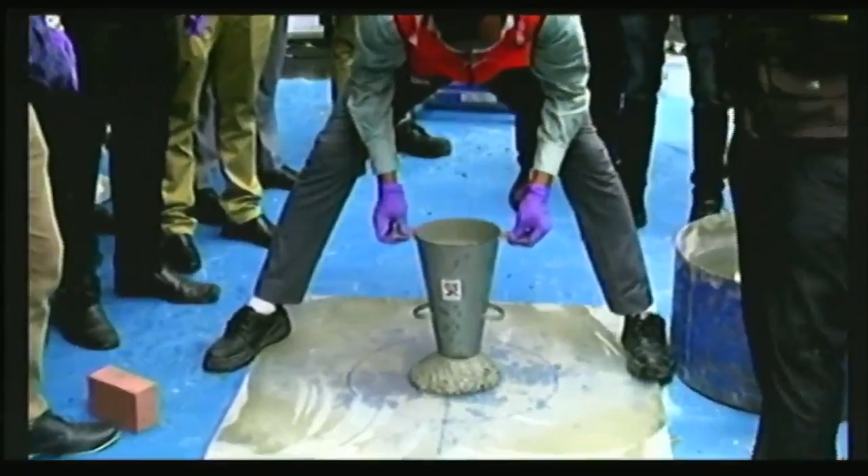Let me answer this question. The mix design we have taken is for M30. This is an M30 mix design where the total cementitious content is only 380 kg. It's not that M40 or M50 has been designed - all these things are for an M30 mix design.

That means the construction chemical industry and other industries concerned are answering the questions of common construction practice. Thank you. Vijay sir, hello - here is the flow, yeah correct.

The 620 dosage is 0.5... 0.55. You can see, based upon the zone of sand, the dosage also varies - zone 1 is 0.55, 565 is the other direction.

I have a question. With 70% replacement of GGBS, what would be the 3-day strength and 7-day strength of this particular concrete?

Vamdev, yeah, I think you should take it. We have this, actually shown in the presentation. Okay, anyway I'll pick it up from Vamdev a little bit later.

Me and Rajendra both have access to it. So at 3 days, normally what we are getting is between 16 to 19 Newton per millimeter square. When you go with 50-50, you get about 18 to 20 - there's a small difference. But at 7 days, we are getting M30. The strength data, earlier strength data, is with us here - yes, we have the strength data.

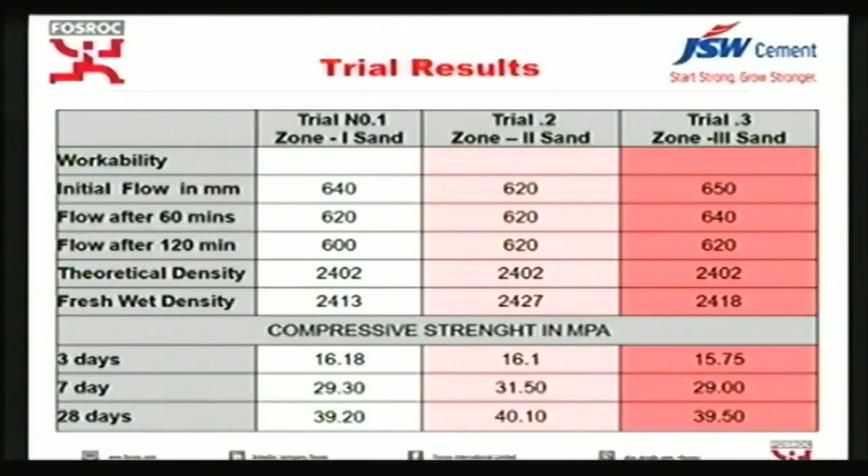Thank you and congratulations. Just to inform you about the V funnel - we did the V funnel test for this. Since we are using 16% 20mm aggregate, it was around 22 to 25 seconds. We measured that V funnel before coming here. But when we use the 10mm downsize aggregate, it comes very close to 13 or 14 seconds.

I have a question. Your water cement ratio is 0.4, and the grade of concrete is M30. So don't you think this is too low a water cement ratio?

No, this is the common mix design for M30 being used here, because the replacement level also has to be considered - 70% replacement is there. This is not a specially designed mix actually; we have taken it from one of the ready mix concrete plants from Bangalore, and we wanted to replicate and demonstrate it here.

This is where, when using 50% and above of either fly ash or GGBFS, the normal water cement ratio people keep is around 0.4 for M30 grade concrete. No, because generally with 0.4 you are likely to get around M45 grade concrete.

No, but that is when you are talking about OPC. When you use OPC, that's fine - you can even go up to close to 0.48 or 0.5. When using 70% or 50% replacement of GGBFS, normally people keep it close to that - this is the practical approach used in most RMCs here in Bangalore, especially for Metro or tunnel forming constructions.

One more question - if I'm going for a 0.3 water cement ratio, will I get the same flow?

We have to increase the dosage. We will get the same flow. The dosage, instead of what we are using, 0.5, 0.6 and 0.8 for the different zones, probably we have to increase the dosage. When I go for higher grades like M60 or M65 with 0.3 water cement ratio, will I get the same flow again? Or the higher end? Yes, again, sir, I have to increase.

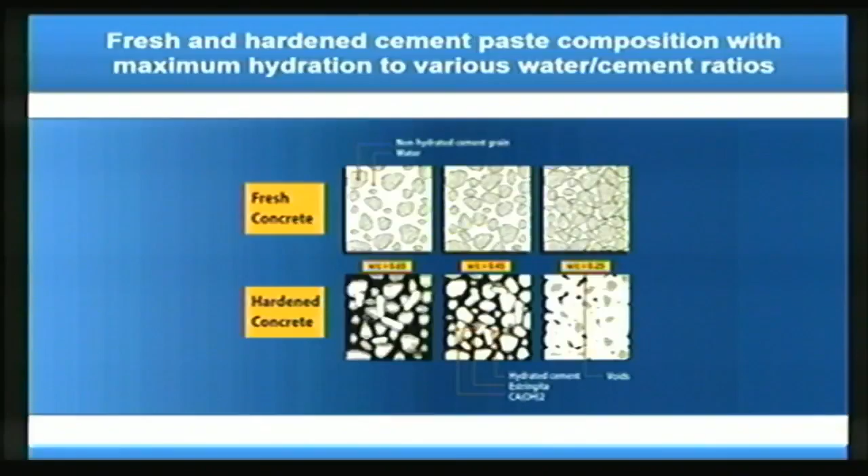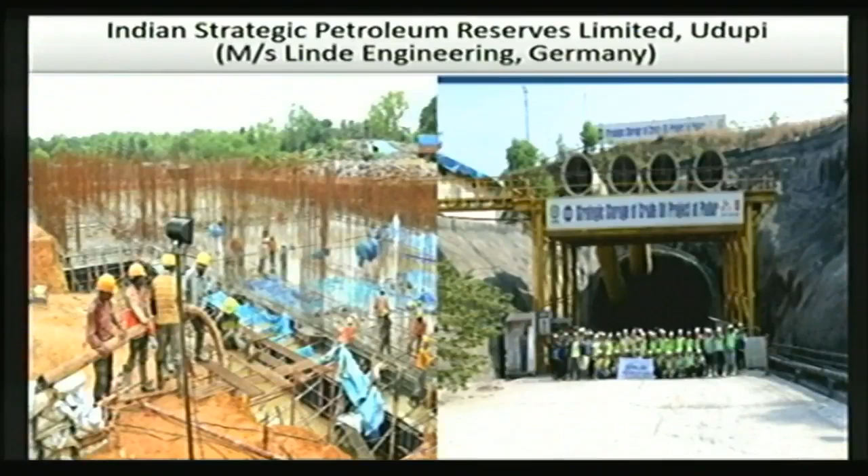Of course, under infrastructure projects, some of the special projects where there have been specific requirements, as I was mentioning. This kind of continuous pour. They didn't want a cold joint, so they went in for a continuous pour of concrete, lasting for about 3 days. This one for shotcreting and other applications there.

Bangalore Water Supply and Sewerage Board, again, they look at specifically the sulfate and chloride attack of concrete, which needs to be fulfilled. Of course, hydroelectric project, where they are looking at heat of hydration control for this mass concreting. Some of the mega buildings, within Bangalore itself, we have been a major associate with L&T in this particular project, where the challenge, as many of you were mentioning, is pumping concrete to greater heights.

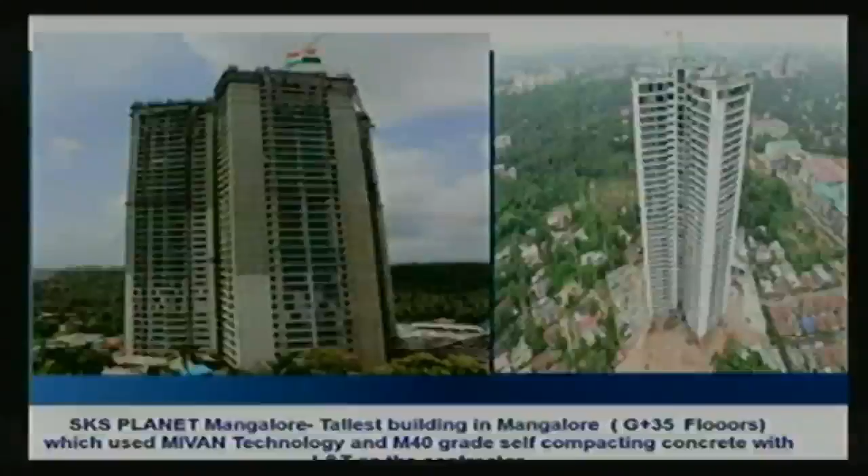Again, here, the usage of MIVAN shuttering, self-compacting concrete, giving a concrete with good finish, doesn't drop. And the admixture dosage and sometimes mix design needs a change as we go up the height because of the change in various parameters of weather. This is, again, a project which is being executed by Brigade in Bangalore itself for precast panels, where we have been supplying.

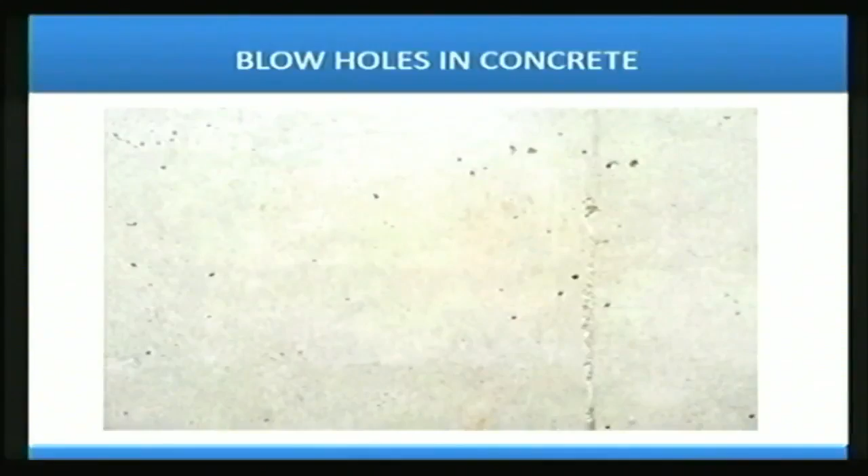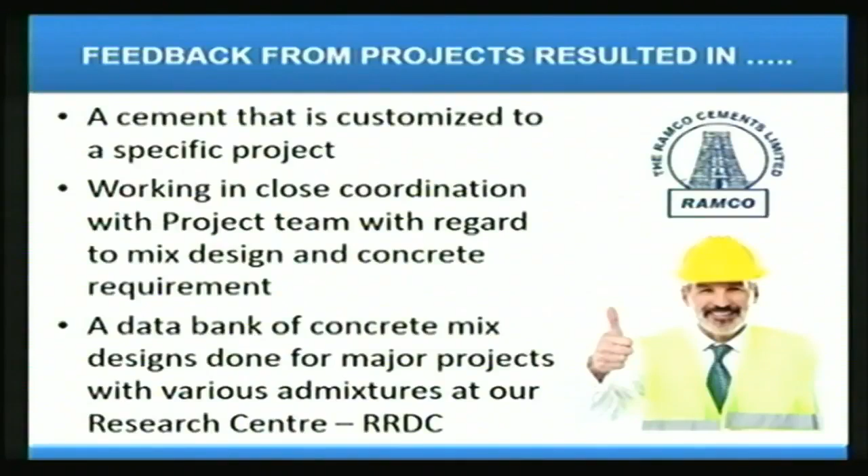The usage of fly ash is nothing new, because it was there right from the Roman era, and heat of hydration can be lowered. Feedback from various projects has resulted in learning for us. In fact, we have been able to give a cement that is customized to the project, and working in close coordination with the project team has resulted in a data bank of mix designs at our Ramco Research Development Center, which is helpful for many of the projects yet to come. We have been receiving the 4 Leaves Award, Green Pro Certification Award, because what is important is how to ensure that the environment is also saved.

So in that aspect, even the technology that is being installed in the cement plant, both in the existing one as well as in the expansion projects, needs to be given more attention. The world-class technology that we have, whether it is in the limestone mines, where we have installed optical sorters, optical sensors, and even a laboratory in the mines itself. And one of the major challenges is how to control the particle size distribution as far as the grinding of cement is concerned. So we have various combinations at the plant manufacturing stage itself.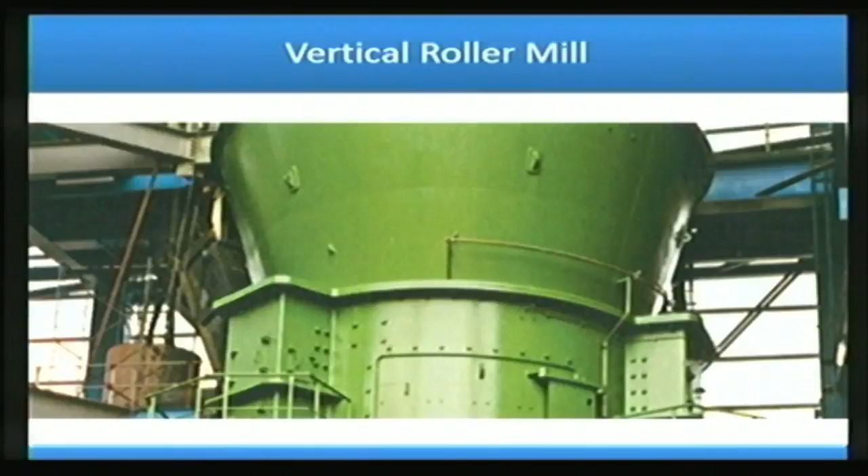There is a combination of ball mill and roller press, and you have VRM as well as roller press finish. So you can have permutations and combinations of various grinding media and grinding aids, so that, not being confined to fineness of cement, we also look at the particle size distribution, which is very critical. So we are able to bring out that.

Cross-belt analyzer to analyze the raw material which is coming into the cement manufacturing process. An online analysis is being done, which helps us to control the quality of cement. The limestone stacker and reclaimer, which is there in our cement plants. Various product range. Of course, the largest selling brand is the Ramco Super Grade, the Portland Pozzolana cement.

We also have slag cement, sulfate resisting Portland cement, and rapid hardening Portland cement for precast elements and components. We also have a dry mix plant at Chennai, where we study the behavior of cement in concrete. This is where we could understand technology from M-Tec Germany, and we have been able to manufacture a wide array of products ranging from Ramco Super Plaster, Ramco Super Fine, the wall putty, and the tile fix, which we cater to various project personnel so that they can fix various kinds of tiles.

What we are doing here is the various kinds of adhesion strength that we could give, even within a thickness of 3 mm of tile fix that is being laid, the block fix, the various kinds of tile grouts that we are manufacturing from our dry mix, and the self-curing plaster, because the challenge is how do we ensure curing. So we looked at that problem and how we can overcome it. We have brought in the self-curing plaster, which takes care of common problems, especially hairline cracks, and the need to do away with curing, and things like hacking.

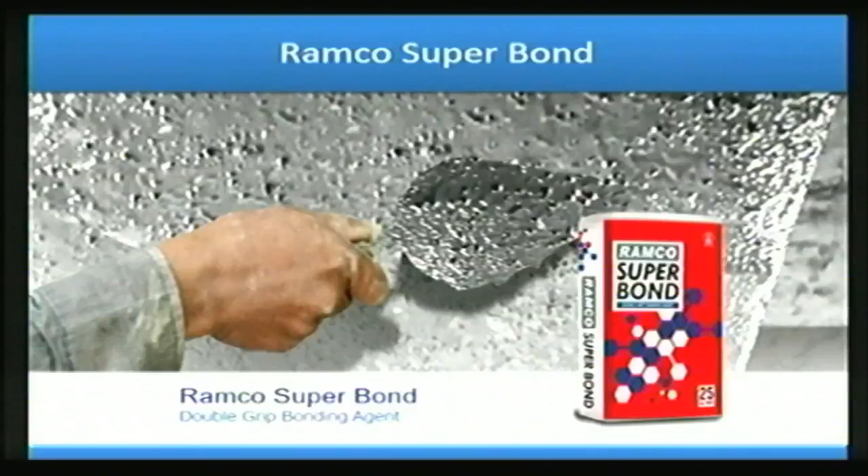Can we do away with hacking? Can we develop a product which can do away with hacking? It is in this aspect we have been able to develop this particular product which gives a grip to the plaster, both chemical as well as physical, when we apply this product on the ceiling. And of course, we have a lot of joint works in collaboration with them.

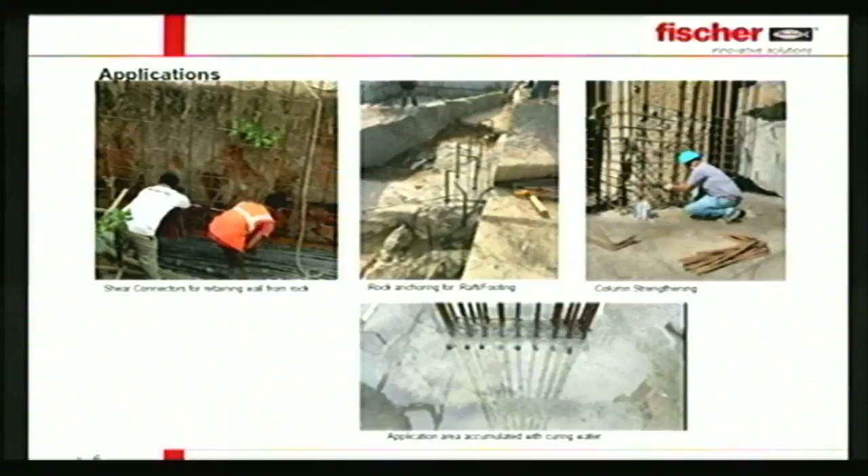Connecting shear connectors on a retaining wall to the rock. Then we have a raft footing. The last picture is something we see at almost every site: curing water lying around and rebarring needs to be done. Fischer's product for this application is FIS-EM, where EM stands for epoxy mortar. It is for rebars from 8 dia to 40 dia, anchoring from 8 dia to 30 dia, rock anchoring applications, and hammer drilled or core drilled holes.

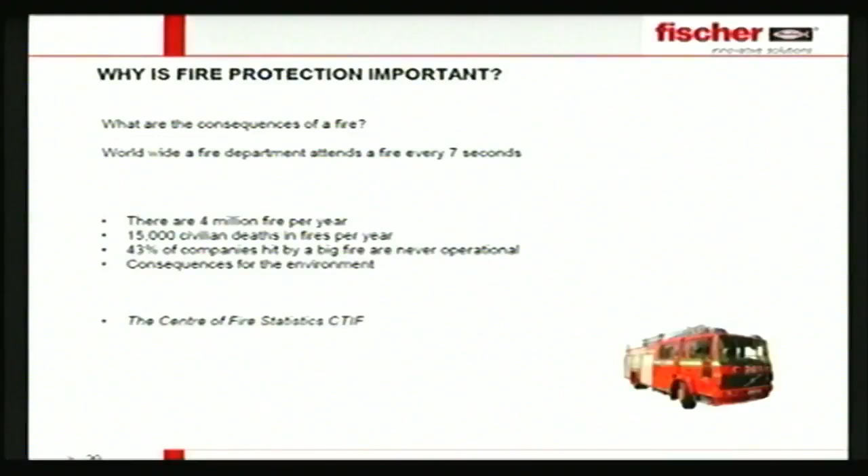The first one being passive fire protection systems. Why is fire protection important? There are fire incidents happening across the globe every year, 15,000 civilian deaths. And over 43% of the companies hit by big fires are never operational ever again. We have the detection system and the suppression system in all our buildings. We see alarms, smoke alarms, sprinklers, everything. These are detection systems and suppression systems ensuring the fire does not spread, but these need an external energy source to get activated.

What we are talking about is containment. These are systems that, once installed, stay there for the building's life and activate only in case of a fire incident. Otherwise, they stay in place as it is. We are creating a containment where, in case of a fire, the fire is contained within the place of origin and does not spread outside into the next area. The fire or the smoke does not move into the next area, hence giving us time to rescue the people.

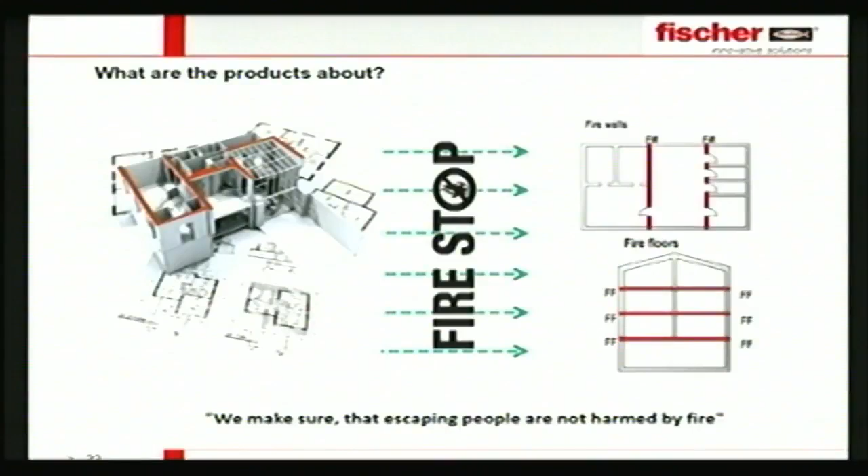The second one we are showing is horizontal compartmentation. So these are the different areas that we come across in any building. We can have top of wall joints, cavity barriers, small openings which can create a hazard in an incident of fire, because smoke travels at almost 30 meters per second. So this becomes critical. Wherever we may be, whichever part of the globe, we may have various regulations in place. But the end idea is simple: the life safety of the occupants and those nearby. So life safety is what we talk about no matter what codes we are talking about.

And then towards the final product line that we have at offer, we've also introduced MEP support systems. We deal with channels, pipe clamps and other product lines where we can support you with designs and also with trainings and applications at site.

Request you to conclude, please.

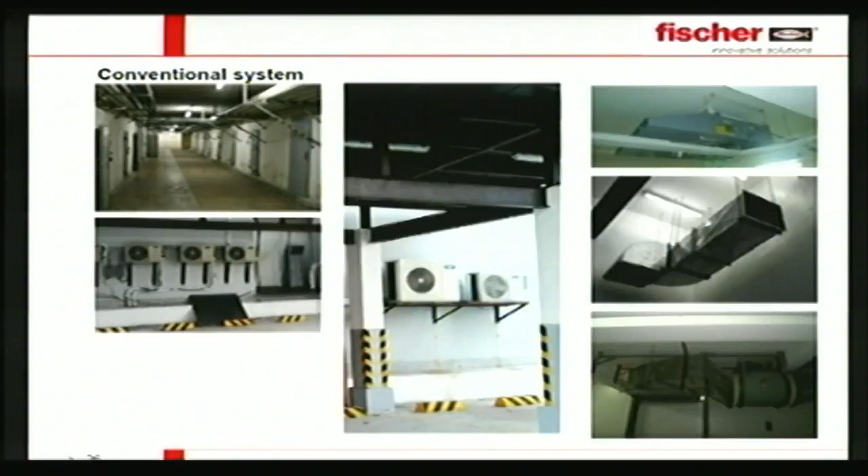Yeah. So here they get the steel, they cut it, they weld it, they primer it, and all these applications are done. These are the conventional systems that are traditionally being followed. What we have at offer is something very simple and very neat in terms of application. I have some more pictures just to show you some of the applications. Of course, this is an industrial plant. This is for a commercial.

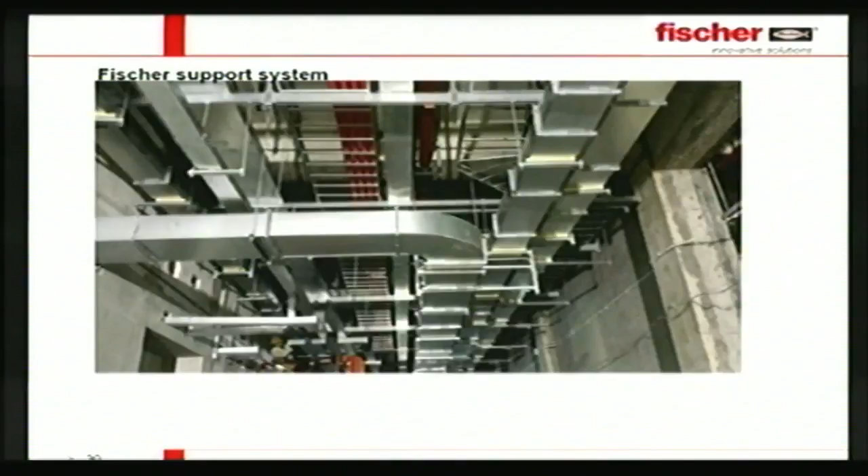Some more application pictures. So advantages being installation is fast and efficient with the modular Fischer system. There's no welding system. So in case of any change of design or any change of requirement, these can be just removed. The bolts can be just removed and changed, and the entire thing can be redone. These are some of the product pictures and the pipe clamps that we have at offer.

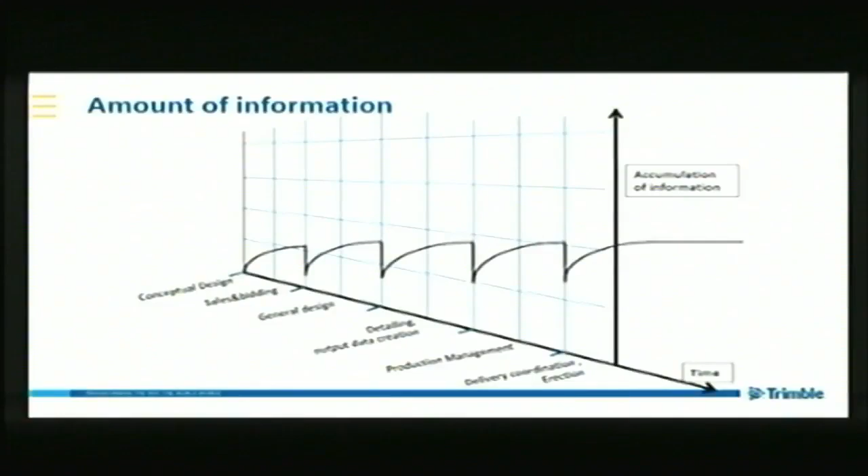Thank you for allowing us to be here. Information about construction, leading organization into the design and construction software solutions. Very quickly, when I'm talking about information, I'm sure most of you would have seen this chart, how basically information flow dips at every stage when we require the detail. So the concept of a new design methodology is erupting, which is a building information model, but we are talking not about the building information model, but beyond that. So that is what is required.

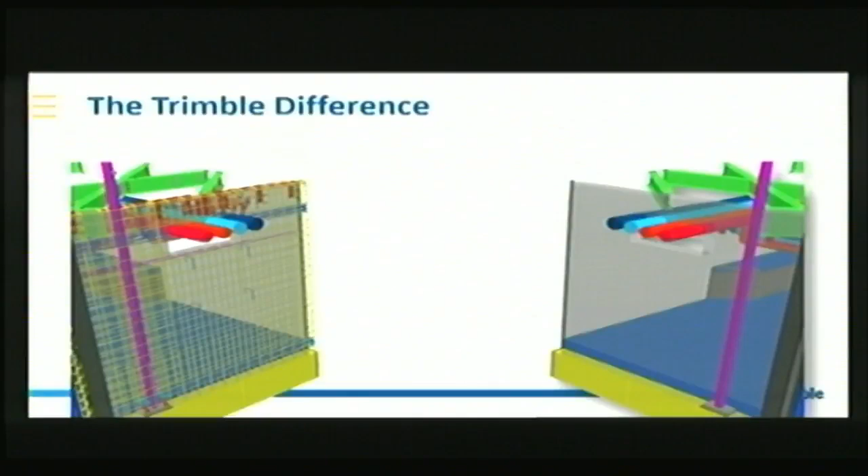So what is the difference Trimble is trying to bring into the overall design phase? You can look at these two pictures, left and right. Both are of the same model, a very crude representation. However, the difference is a simple engineering model may not be sufficient to start the construction, and for the contractor or the fabricator our software solutions allow you to build the level of detail of the highest degree.

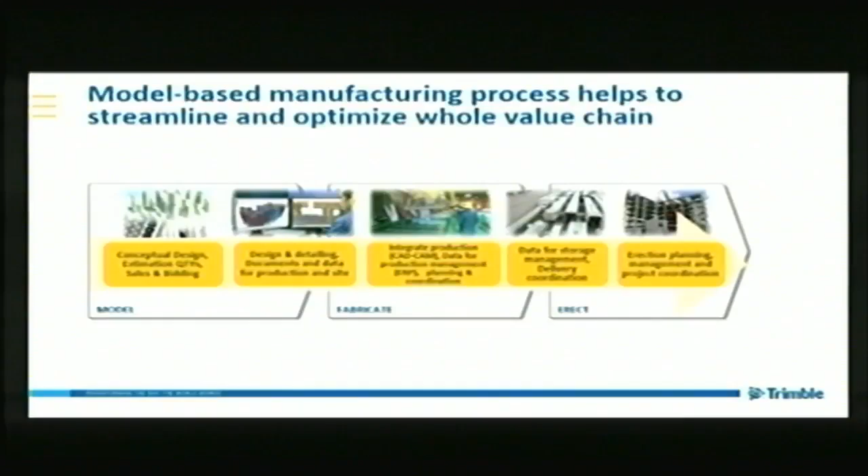What is the philosophy? Traditionally, construction and manufacturing are two different industries. They differently drive the country's economy. However, there is always a competition between these two segments, but now it is narrowing down. Even construction is moving towards manufacturing, and that is where precast construction is coming into the picture. And we basically support this entire life cycle on the construction side, rather than only supporting the design phase of the construction. So our ecosystem, if you look at the contractors who are into planning, has a

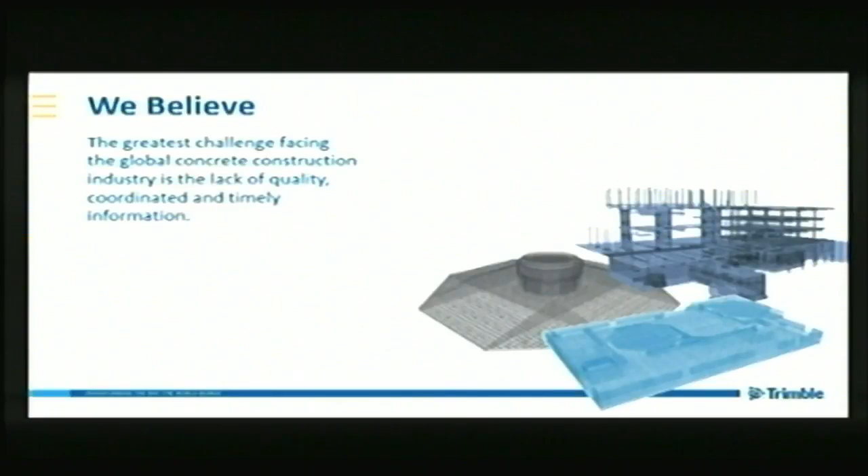So it is not only about managing the engineering information, it is primarily managing the site, the construction. When the construction is taking place, we manage this life cycle. So as I said, managing the information is the biggest challenge. When we talk about affordability, cost effectiveness, if we are able to bring this information in a timely manner, costs go down, because from whatever I've seen in my career, the design still plays an important role, but from the cost perspective, it is still a very minuscule percentage of money which impacts the overall cost. The cost primarily needs to be controlled in terms of labor, equipment, machinery, material, all of that. And so there is a lot in the overall life cycle which we can take away from it.

My simple messaging from the software fraternity perspective, if we are sitting here from the designing side: transferring the information from the design level to the site level, and the concept of modeling, planning, and pouring needs to be synchronized, rather than we just focus on creating a 3D model.